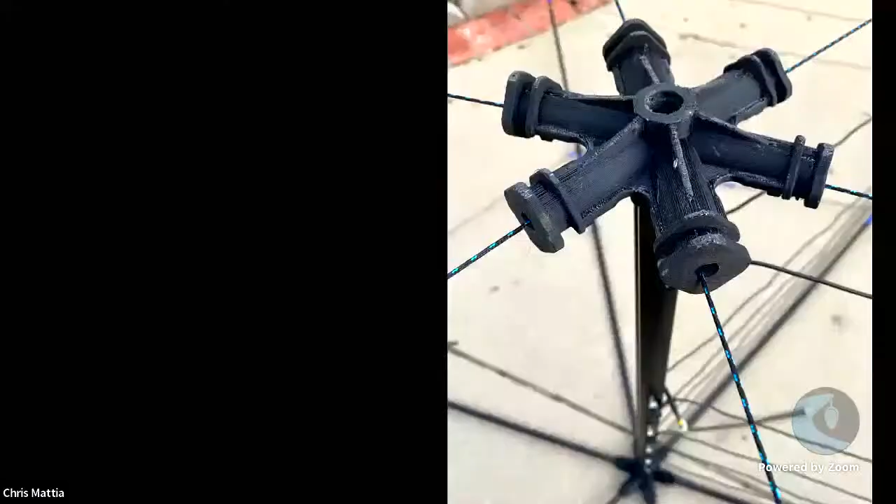For me, it was this day. The BuddiHex arrived to me in the mail. I set it up, and when I got to looking at it closely, I realized that the entire thing had been 3D printed. This was an early prototype of the BuddiHex that I was beta testing, and it had been designed on a computer by a ham, printed out by the hams, and then sent out to other hams to be able to test and operate.

I was able to make contacts around the world with this. The light bulb at this point went on in my mind. I'm a ham, I can do this as well. I can create things as well. I just need to get the right tools to be able to do that. A lot of that comes out of your own imagination.

So I started to begin to modify some of my own gear, much like a lot of hams do, and started to hack together various different projects from other parts that I had laying around the house, or as one of my colleagues likes to say, crap from my garage. We were able to put together a rotator to be able to rotate the hex, and it worked. It worked really well. But that was just the beginning.

Now we want to start taking this world of being able to make and design and create content and do it in a way that really can take your content to the next level for what you're doing within ham radio.

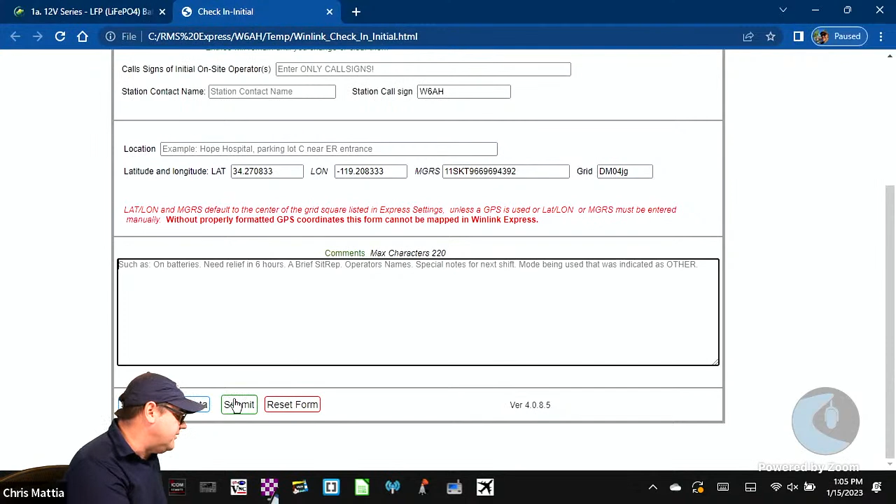After you finish filling all of that out, go ahead and hit the submit button. I'm going to close this and minimize this real quick. It'll fill in the information here in the form, and then just go ahead and post that to the outbox, and then open the session and send the message.

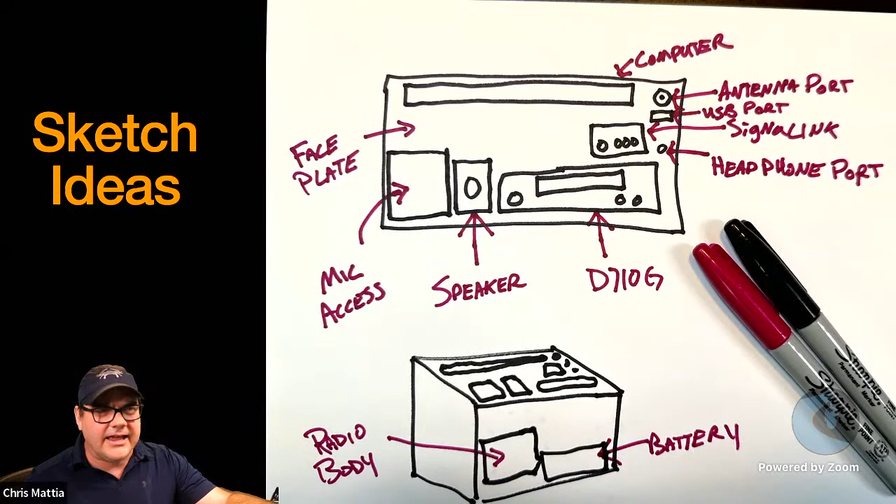In this case, I was laying out an idea for a Go box, and I literally just used a couple of markers and a piece of paper. It's a perfect way to get started. And for some projects, this may be all you need to be able to do. So don't think you have to go through all the different layers and layers of design in order to be able to do this.

The next option would be to build some kind of a scale model. And a great way to accomplish this is to literally take your pieces of equipment, grab that old shipping cardboard box that just showed up at your door, open it up, put the piece of gear on it that you want to incorporate or sketch out some ideas, trace around it, and then cut it out. Now you have models that are the right size.

You may need to modify your model so that you've got the body of a component. You may need the faceplate with both the depth of it as well as the look down on it, so you get a real sense as to the dimensions as you're trying to lay out an object. Again, this is super, super easy to be able to do, and it's something that probably all of us have done at one point or another.

What we're going to dive into today is virtual 3D modeling, and we're going to use a tool called Fusion 360. Now, Fusion 360 is a professional engineering tool for building 3D models, and it does all kinds of fancy stuff that we're going to barely even scratch the surface on. We're going to just focus in on what hams need to know in order to be able to become a little bit proficient. And today our goal is to try and build 3 different models.

The first model we're going to build is a battery. So if you're looking for different gear, you may be looking at a variety of the different batteries that are offered by a company. And you may be wondering to yourself, hey, will this particular battery fit in the box that I'm building, or is that battery going to fit?

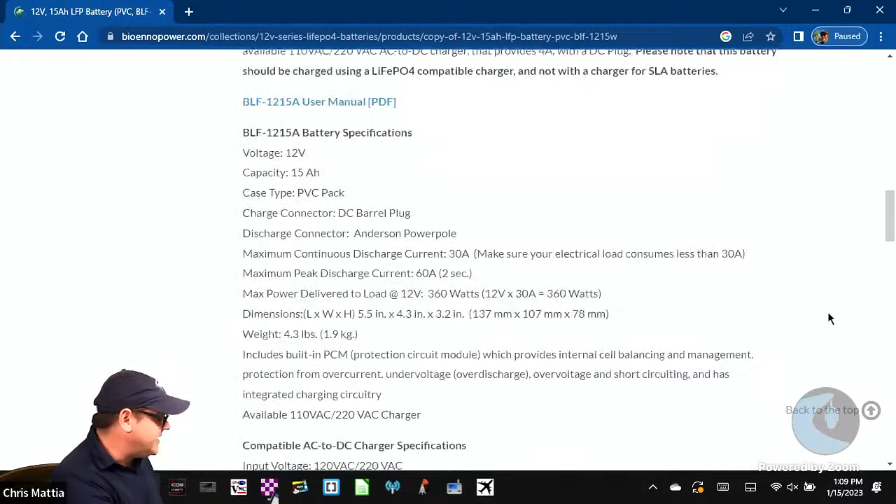If you look on a lot of these pages from manufactured products, if we scroll down the list, you'll oftentimes find a line that has the dimensions of that product. Here it is right here, 137 millimeters by 107 by 78 millimeters. Well, how big is that? How big is that in comparison to other things?

You can of course take your ruler and get it out and start measuring things. You can sketch it out on cardboard. That would help. But we're going to start with that model. Then for our second project, we're going to actually model one of my radios, the body of the Kenwood D710G.

What I want you to get a sense of as we do that is the process of measuring different components, making a virtual model that shows exactly or roughly where the different components are. So if you spin it around in 3D space, you have a good sense as to where your connectors need to be, where the heat sink needs to be, is the power cord going to line up with what you need. Those sorts of things. So we're not getting into crazy detail.

Then for our third project that we're going to work on today, we're going to try to create from scratch. We're going to look at a couple of different products that are out there in the market right now, and I'll talk about the problems I have with the versions I've seen. Then we're going to design a replacement from scratch inside of Fusion 360, and then we'll 3D print it out. So we have a model that will show us how to do that.

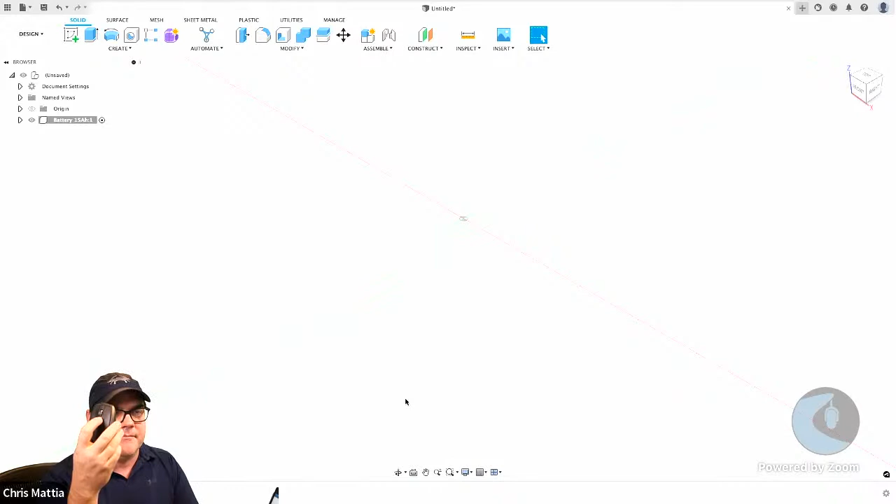Down here at the bottom, there are some additional controls for you. The very first one is a rotate or orbit item. If you have a mouse with a middle button, not the wheel but a middle button, you can click on that, and as you drag around, it will pan your object around. If you hold down the shift key while holding the middle button, it will allow you to spin that object around in all kinds of ways. You can always come up and click home to get back to the normal view.

If you do not have a middle button, just click on orbit and then click and drag around. Pan would be the hand—click and drag around. If you have a trackpad, like on a laptop, many of them let you set a gesture of two fingers to pan around, and holding shift with two fingers will allow you to rotate it. So that's how you work with the objects in here.

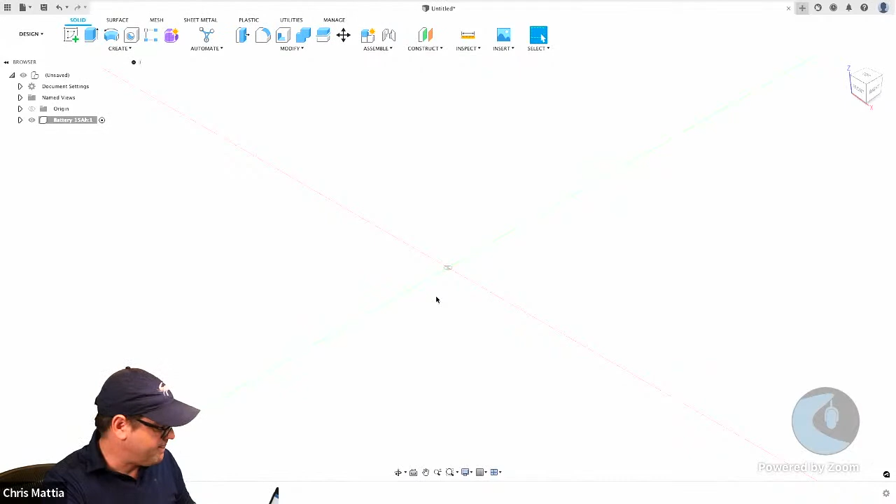So let's start building out this battery. If I quickly jump back over, we can see that this battery is 137, and we're going to work in millimeters.

Why millimeters? Well, because I didn't like fractions when I was in school, and I don't want to mess with fractional inches or decimal inches or any of that stuff. You're welcome to do that if you'd like, but working in millimeters is easier since most models you find online are all in millimeters.

I should also mention that the only tool you need for doing this is a simple ruler. Any ruler will do—that quick, cheap little plastic ruler works just fine. Just make sure you've got one where you can read the different units clearly. Do you need a fancy one of these things? No, you don't. You can do this with just a simple ruler. This is all I've used to build all the models I've built thus far.

And for taking measurements on existing things, literally just lay them down, put the ruler on top, and measure what it is. It's that simple.

You're not having to do anything beyond that. Since I'm in the overhead cam, let me also talk a little bit about what this thing called a component is. So we're going to work within this project.

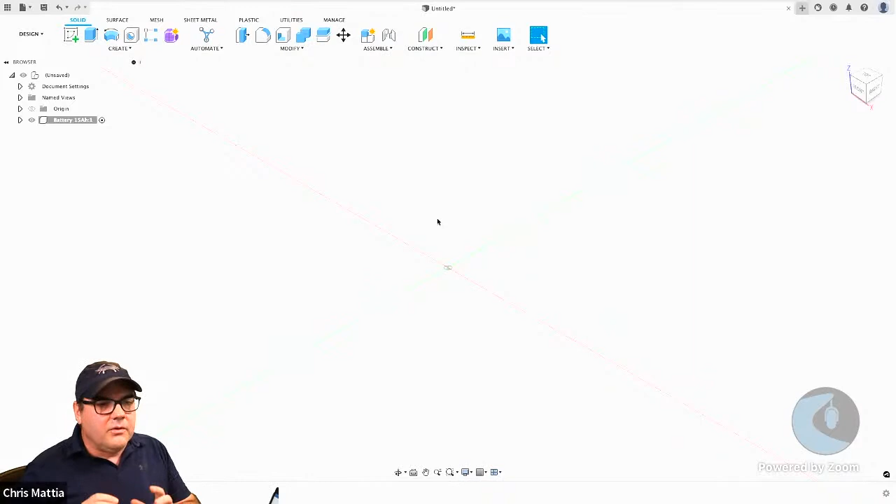And when I say project, I mean we're going to build a battery in one file. We're going to build a radio in another file. That's going to be our project. In the world of engineers, of building things within Fusion, you would start to think of individual components.

The top case of the KX3 here would be a component. The VFO knob would be a different component. This knob would be a different component. If you were to open it up and look inside, this circuit board would be a different component, and this board would be a different component. The back would be one, the top would be one.

We're not going to get into that. We're not going to even mess with any of those things. We're going to do a very simple model of this. So don't get yourself too confused and too worried about some of that terminology. You can get more complicated if you need to, but you really don't have to.

All right, so we're going to go back to, where'd it go? Oops, there's my walk up. Boop, that one. All right, so we have an object that is 137 by 107 millimeters by 78 millimeters. So let's go ahead and build that.

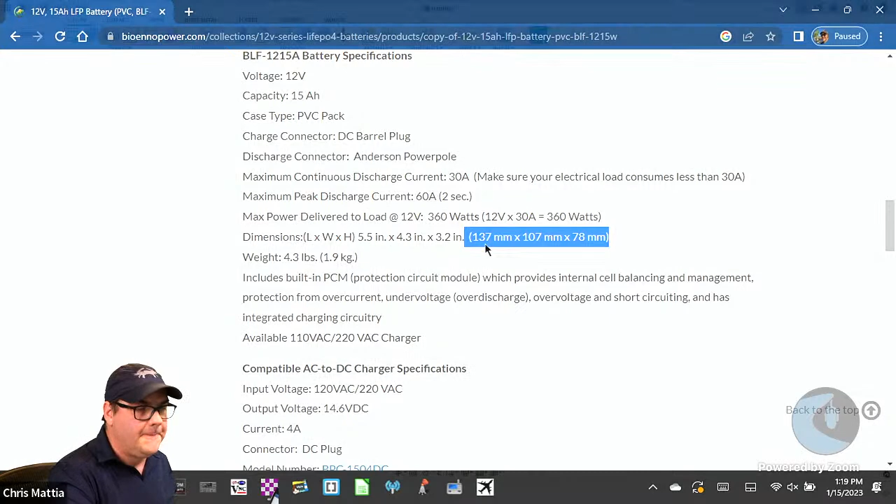All right, so I've got my Fusion project. The first thing you do, remember, is create your component. The second thing you do is you're going to create a sketch. You always start by creating a sketch of something, whether it be a sketch on paper or a sketch in 3D.

And if you look up here in the toolbar, this very first icon up here is the Create Sketch icon. So you just go ahead and click on that, and you get this little origin thing that shows up here. And what the heck is all of that?

Well, what we need to do is we need to tell the sketch, we need to tell Fusion 360 which axis we want to draw on. We want to draw just looking down on the top to be able to build this. So we're just going to click on this portion on the upper right. We're going to click on that, and notice it just spins around and drops us down.

If you look at our little widget up here in the top, you can see we're looking at the top. You could have also clicked the top here and it would have spun us right down to this location. Okay, so we've got our sketch now.

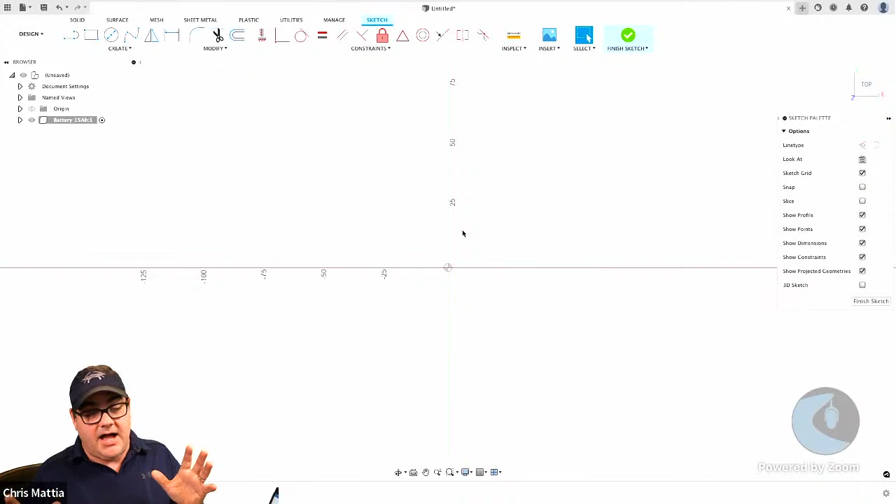Now what we need to do is actually draw a box, because the battery is essentially a cube. So you're going to come up here to the top, and notice our tools have now changed. These are now the sketch tools, and we're going to start with a rectangle tool.

So we're just going to come up here, click on the rectangle. We're going to come down. The center point, if you remember back to grade school when you learned about XY coordinates, the center of that, the 0,0 point that's right here, we're going to start drawing from there. So we're just going to click right at that point, and we're going to start to drag out.

And you'll notice a couple of things. First of all, we get values that show up both at the top and on the left and on the right, or on the bottom and on the left-hand side. And it highlights for what size we've drawn.

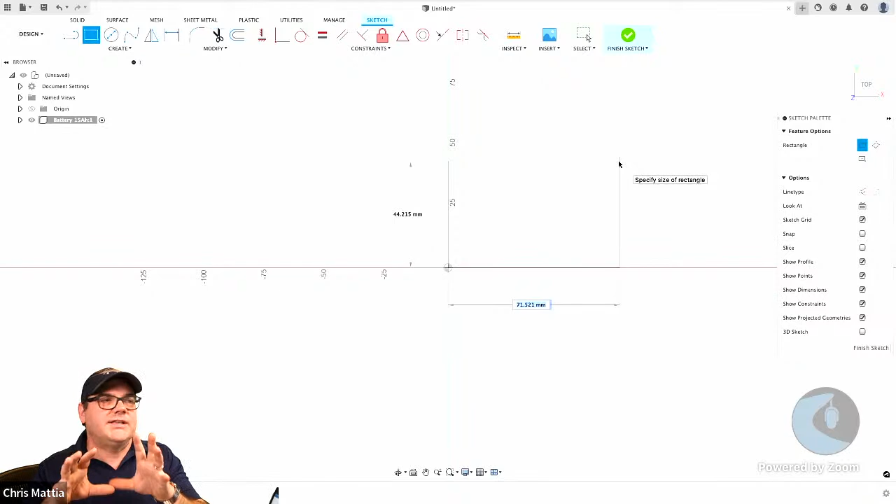So you could try and draw out 137 here. Whoops, let me undo that. I didn't mean to let go. Let me come back and start over again. Click and drag out. You could try and drag out until you got that bottom value to be 137, but you don't have to. You can see how it's highlighted already.

So I'm just going to go ahead and type in 137, and it locks that in. And you can see right next to the value that I just typed in, a little lock icon appeared, meaning, hey, this is the value that he really wants.

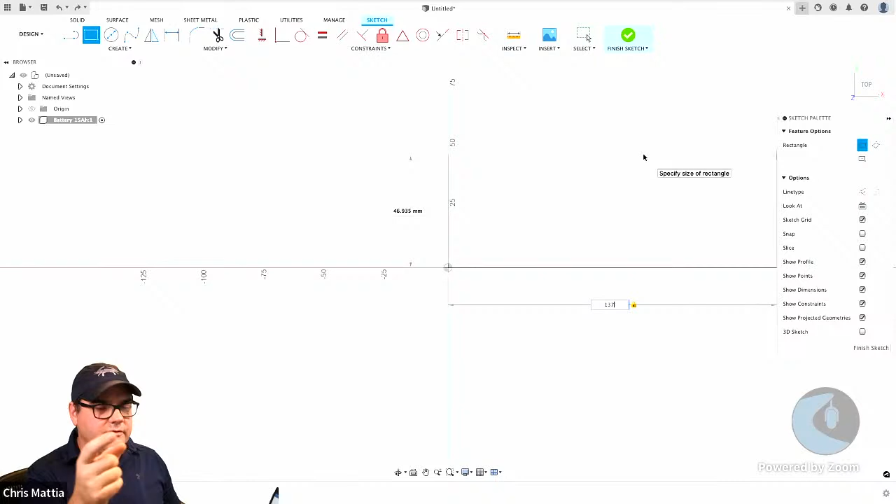So now we want to jump over to the y-axis. I'm going to hit the tab key. So you just hit the tab. Notice it jumps over to that other axis. And now we type in the value for that dimension, which is 107.

I just type in 107. It jumps up to that and locks in. Now I'm just going to hit the return or enter key on my keyboard, and I now have my rectangle.

I'm going to use the center mouse button to pan. If you don't have a center mouse button, just grab the little hand, click and drag. The wheel on my mouse allows me to zoom in and out, so we can get a better view of what this box looks like.

So this is the bottom of our battery. Now we want to add some depth to it. Right now we're working inside of our sketch, so we want to be finished with this. We want to extrude this up.

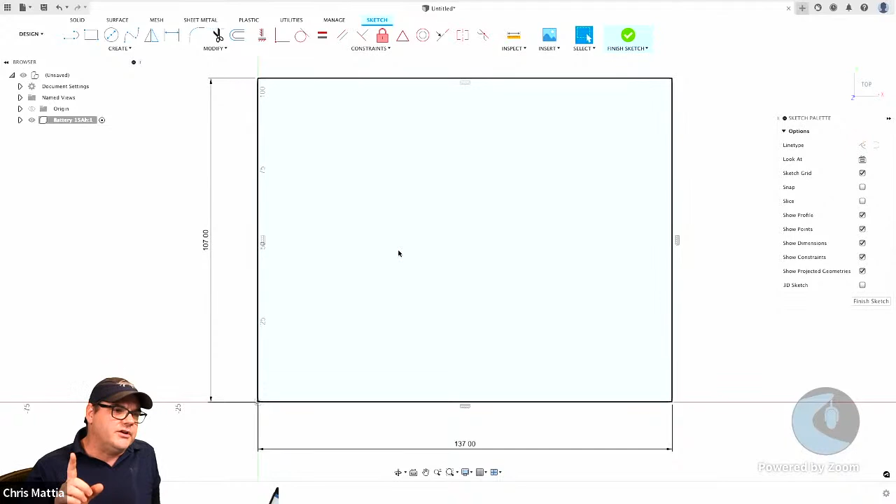We're going to use a command - the first keyboard command I want to teach you, and that is the press-pull command. You enter press-pull by simply pressing the Q key on your keyboard. So I'm going to press Q, and now over here on the right, my sidebar has changed and tells me I'm in the press-pull tool, and I need to make a selection. So I just click on the thing I want to press and pull.

Fusion selects that and creates a little place for me to enter a value. If we go back and look at the depth of this battery, it is 78 millimeters. So again, I just type in 78, and then hit enter on my keyboard.

Now, it doesn't look like anything happened other than this is now gray. But if I hold this and orbit around - if you don't have the middle mouse button, click orbit - I'm going to hold down the shift key, click the middle mouse button, and rotate, and we now have a cube that is exactly the right size for the battery.

So this is the size of a 15 amp hour Bioenno battery.

That's kind of cool. Let's go ahead and save this project.

I'm just going to come up here - there's a little page icon, looks just like the new mail message in Winlink. I'm going to click the little page icon and say save. You can also use Command or Control S to save that. And I'm going to call this my battery_15 amp hour, and just go ahead and save it in the default location and say save.

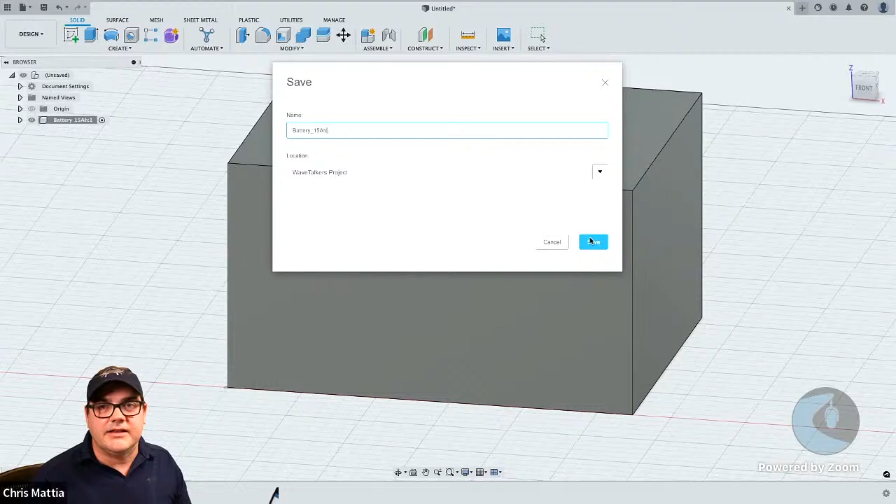Now, when you're working in Fusion 360, everything is stored up on their servers. There's nothing locally stored on your computer - it's all stored remotely up in the cloud, which is really nice because once you have Fusion set up and running, if you go to a different computer, you can just log into Fusion and get access to all of your files.

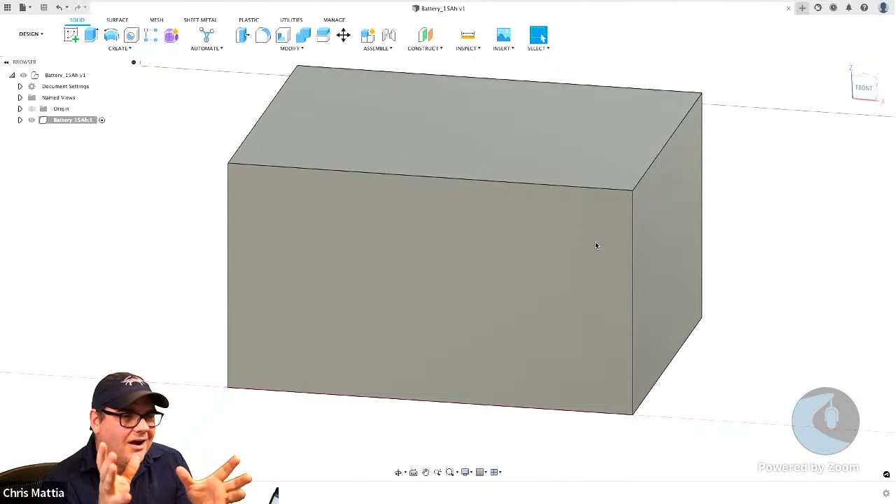Now, we could think this model is finished at this point - we could just plop this into other things and have this to work with. But I like to be able to look at this and go, hey, that's a battery. And I know most of my Bioenno batteries are all this kind of blue color, so let's go ahead and add a little color to it.

So I'm going to come up here and go up to modify. You can see these tools are grouped - there's a create section and a modify section here. I'm going to click the little dropdown right under modify, and if we come down the list, you'll see there's an option for appearance, with a little A next to it. So I'll go ahead and click on that, and it brings up this other little toolbar.

Now, this has a lot of different types of objects you may want to have - how do you want to add some appearance changes to this? If I come down a little bit, you'll see there's an option here for paint. I'm going to go ahead and click on the little folder for paint, and let's go ahead and open up the glossy paint folder.

Stay clicking on it. Come on.

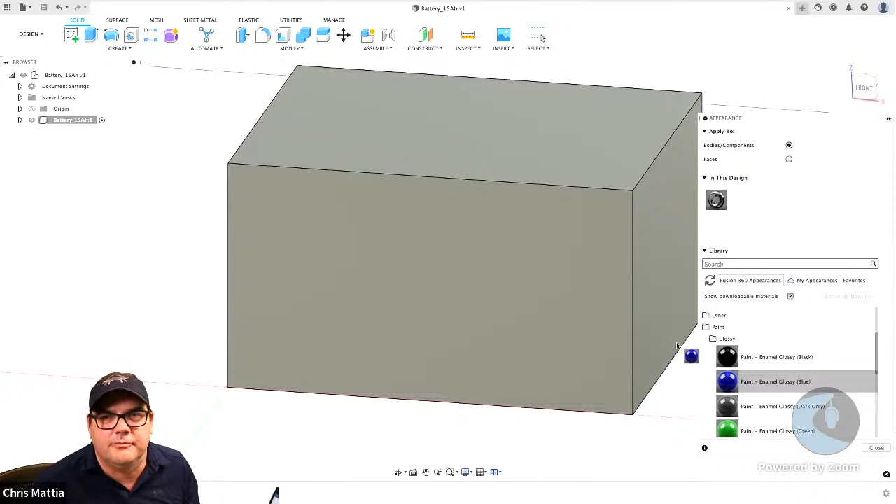Double click on it and it'll open. There you go, here's a nice blue color. I don't care if this is the right blue or not. I'm just going to take that little blue ball, drag it over, and drop it on the model. Now I have a blue box that is the exact right size for this particular battery.

So if you think back to last week where we were talking about designing a Go box, will this particular battery fit inside of the box? You could very quickly build out a couple of different models for the different batteries you're considering and drop them into your virtual Go box. You can see, does it fit? Will it fit in this orientation? Will it fit in that orientation? And so forth.

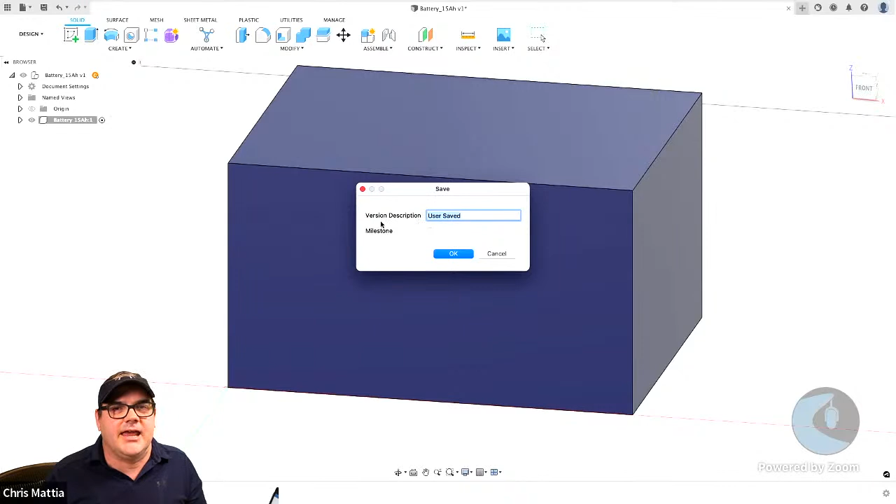I'm going to go up to the file menu and save. Each time after the initial save, you get these little pop-ups that say version description. It initially says user saved. That's fine, we'll go ahead and say okay.

Now what that's doing, you come up to the top and you'll see this little waffle menu, this little grid of icons in the upper left. If I click on that, it brings up a little sidebar over here, and this shows you all of your different projects and all of the different files you've saved. Here is that battery, 15 amp hours. If you look off to the right, there's a version number and a little drop down next to that. You can click on this and see each different version, since it saves a full history as you are building your file.

So if you get into working on something and realize, hey, yesterday I was working on this and it looked a lot better, you can actually go back and open up a previous version of that file, and it'll work just fine for you. So that's how you build a basic project.

Now we're going to take this to the next level. We're going to go through and model my Kenwood D710G. If you look at the body of the box, it is basically a box, a little cube. I have the dimensions written down. You would normally just go through and put your ruler on here and measure what that is. This is roughly 137 millimeters in that direction.

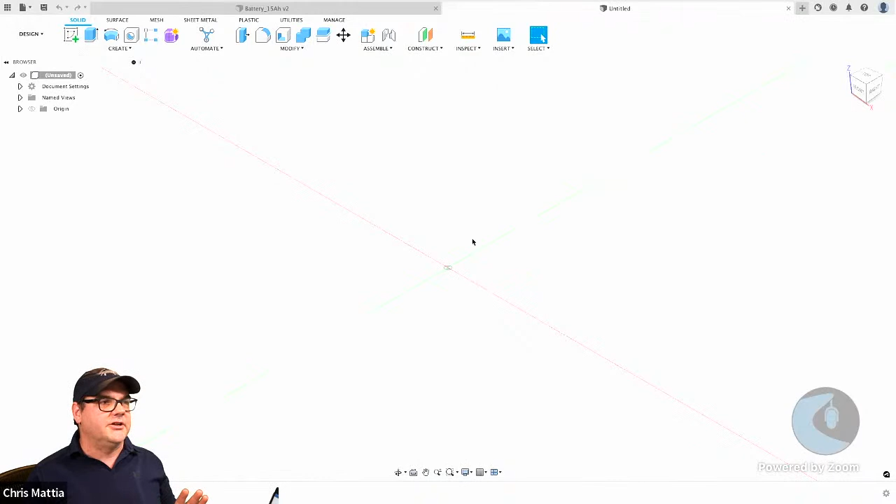I'm going to get rid of the little sidebar over here by simply clicking that waffle menu at the top, and that goes away just to save a little screen real estate so it's easier for us to see and focus on what we're building. Just as before, we're going to start off by creating a new component. I'm going to right click, or control click on a Mac, on this top item, and we're going to say new component. It's going to spring open this window, and I'm going to change the name and call this D710G.

Ladies and gentlemen, I think we lost Chris. Or is it me? Sorry? Do we? Oh, it was me. Never mind. Still there? Okay. Apparently, sorry, thought I lost you. Yeah, well, no, you did. He froze up to me as well. Oh, I froze a little bit. Yeah, my internet connection, we're having monsoons here in California.

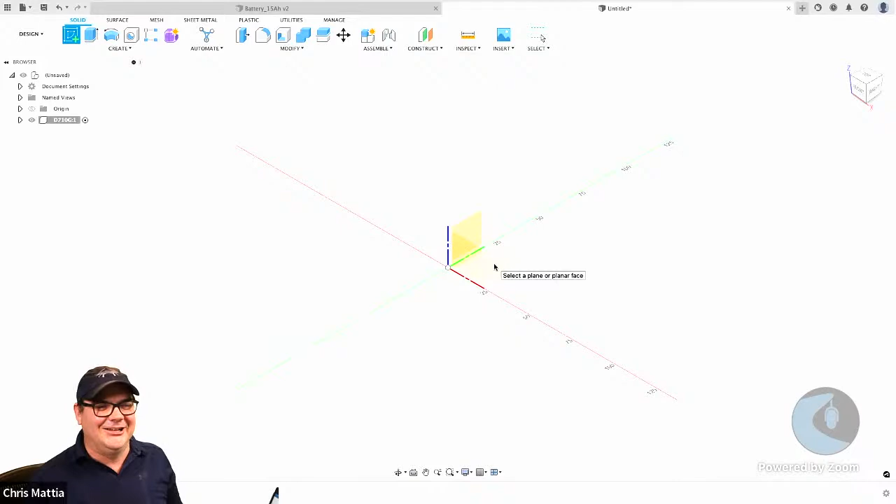Okay, so I'm going to click on this upper right corner. That's going to take us into the XY coordinate grid. Once again, we're going to create a box using the rectangle tool. Come back down here to the origin.

I'm going to click and drag away from the center origin, and type in my first side. I'm going to make that side 137 millimeters. I'll hit the tab key, which takes me over to my Y coordinates, and type in 143. Then hit enter or return on my keyboard, and that locks in my rectangle.

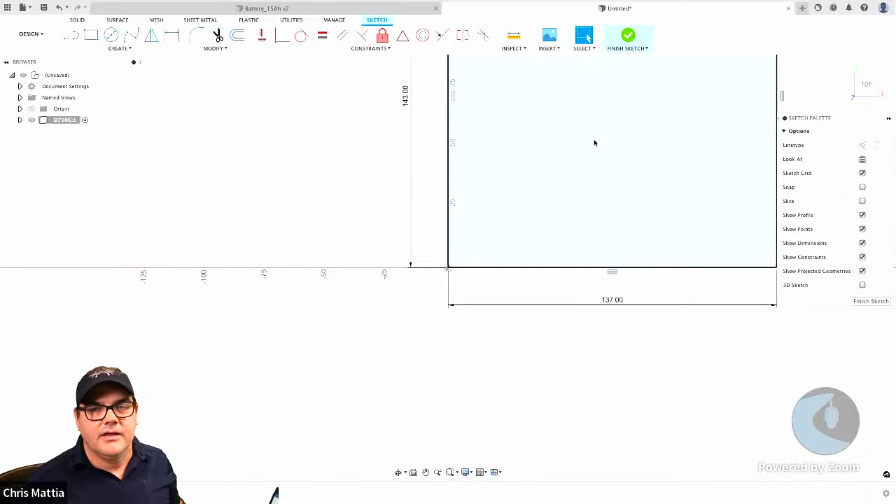I'm going to use the middle mouse button to click and drag and bring this back into view. And I have my scroll wheel so I can zoom in and out on that object. So we've got our base sketch now.

Now let's add the depth that we need. We have the body of our radio, and that radio is going to be 42 millimeters high. So once again, we're going to use that Q command on our keyboard. Just press Q, and it's going to take us into the press pull. We select the sketch, and it asks us how big do we want this to be. We're going to type in 42, and hit enter or return.

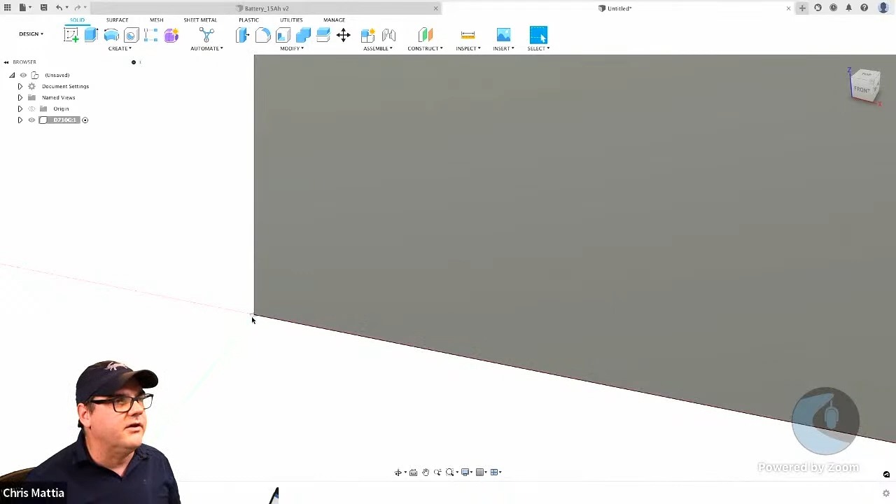Now if I hold down shift and use the middle mouse button to orbit, this is the size of my Kenwood D710G. You can see down here in the lower left-hand corner, that's that origin point. If I zoom in a little bit, just scrolling in on the wheel, that little origin is where we started drawing from.

So we are going to refer to this face right here as the front of the radio. And I'm going to hold down the shift key, use the middle mouse button, and drag around to the back. This face here is going to be the back of the radio. I'm just going to go ahead and click on that and select it.

Now we want to start laying out the components that are on the back. We've got our SO239 connection, we've got a fan back there, we've got all of those different components. So we want to start sketching those out.

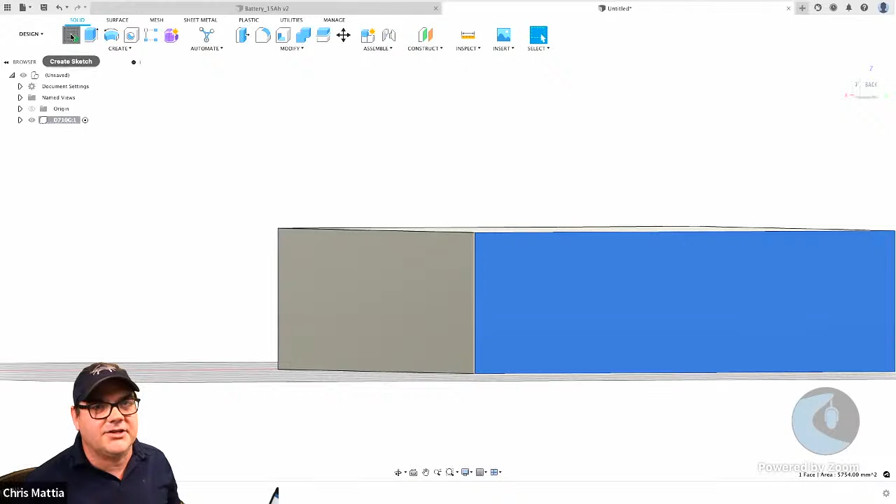The sketch, you can sketch on the surface of any other object. So we have this back face selected. I'm just going to come up here and click on sketch, and notice it just kind of snaps down in. I'll click on the middle button to pan that over so it's centered again, and zoom in just a little bit.

This is a new sketch that's now on the back of the radio. Now, what am I talking about with these sketches? If you look over in this components browser on the left, come down here to the bottom. Here's our D710G. This is the component that we're working in.

And if we twirl this down, you can see there are a couple of other items inside of this component. There's origins, there's bodies. So the radio is a body, this box that we have is a body. And then we have sketches. If I twirl that down, you can see there are two sketches currently.

So I'm going to click on the first sketch, click on the name of it one more time, and I'm going to edit that, and change this to the body of D710G.

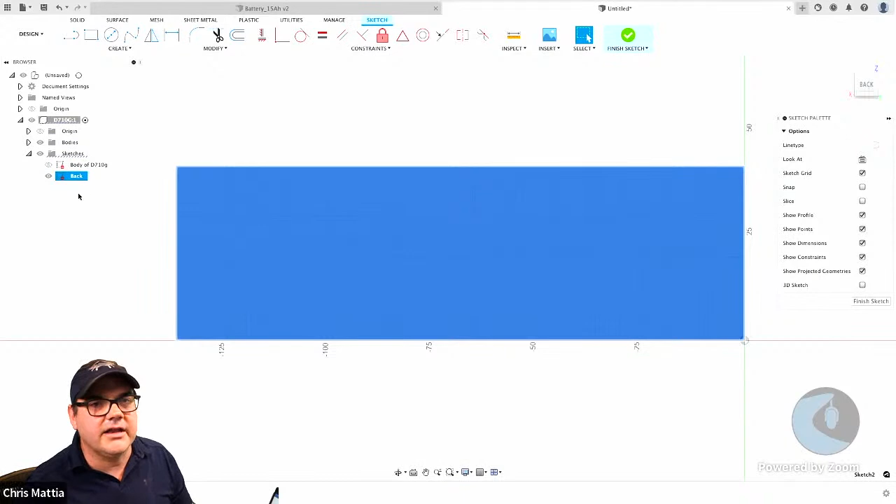Hit return. I'm going to take the second sketch, click on that name one time, notice it highlights it. Click a second time, and I'm going to call this the back of my radio. So now we know that this sketch is for the back.

So we're here inside of Fusion, and what we're going to do is make an SO239 connection. We're going to come up here, and the simple shape that looks closest to that is the circle. So I'm going to click on the circle and come down here.

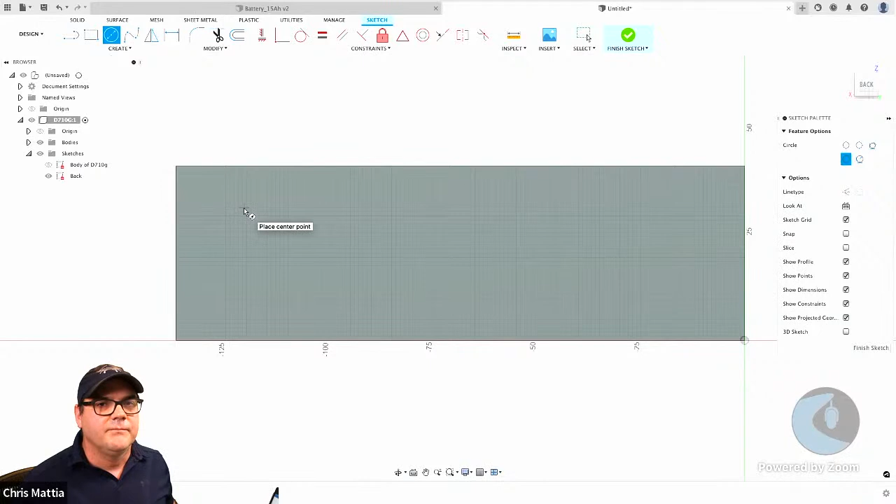When you draw a circle inside of Fusion, you start with the center of the circle and click and drag out. You'll notice we get those values showing, asking how big this circle should be. This circle needs to be 15 millimeters, so I type in 15 and hit enter, and I have a circle. Is it placed in the right spot? I don't care right now, it's just got to be close enough.

Next, I'm going to make a box. I'll come back to my rectangle tool and make a box because the next item is pretty much right next to it. I'm just going to click and drag a box next to it. It doesn't have to be super precise because once again we get our values to type in. This is going to be 40 millimeters, so I type in 40, hit the tab key, it'll jump over to my other axis, and once again type in 40 and hit enter. Now I have a 40 by 40 millimeter box.

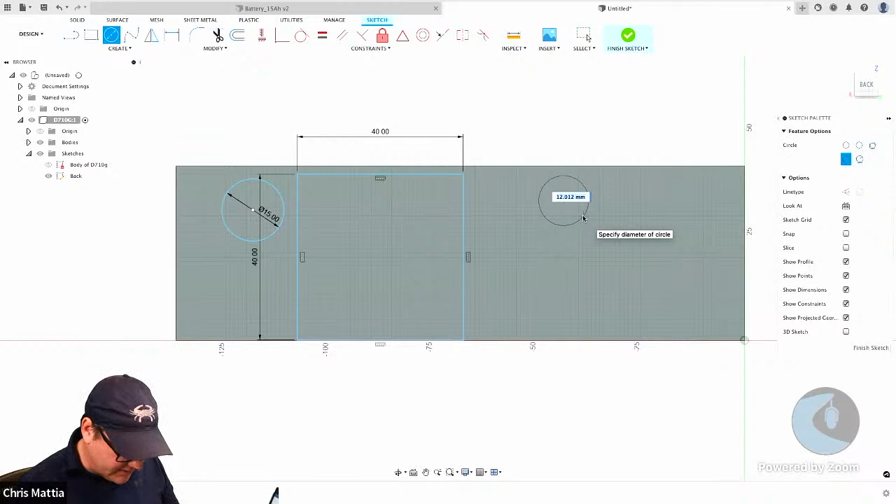Perfect, we're rocking through this. Now we need our two data ports up here, those are both circular shaped, so we'll come up and grab our circle again, click and drag to create a circle. These circles are going to be 10 millimeters in diameter, so I type in 10, hit enter, and I'll create another one of those. Grab the circle tool, click, drag, 10, hit enter.

Let's go ahead and make the bottom two as well, those are both 7 millimeters in diameter. I'll come back up, grab my circle tool one more time, click, drag, type 7, enter. Got a 7 millimeter circle. Come back one more time, circle, click, drag, 7, enter. All right, we've got all of the ports that we really need to have.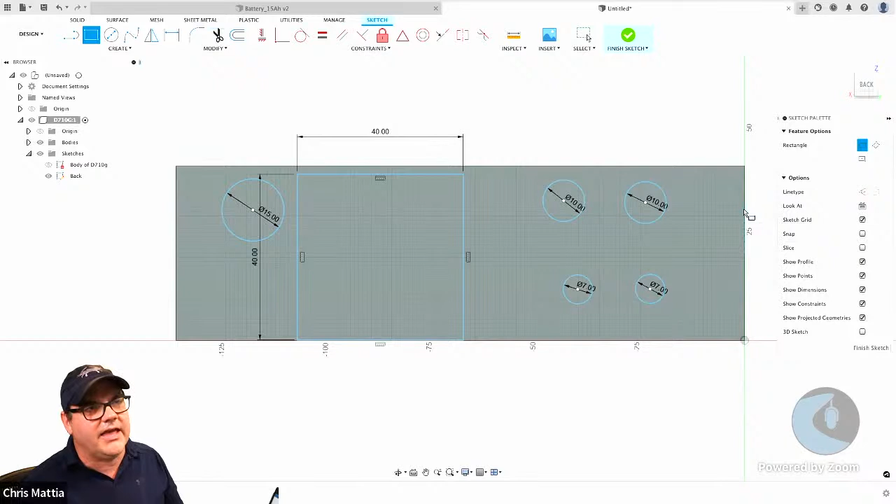We also want to have these two little wings that go on either side, and the important one is this one over here. So we come back up to the top, that's a rectangular shaped object. This time I want it right off the edge of the body of the radio, so I move the mouse right over to the edge, right on the edge of it, and then click and drag inward and down. Fusion figures this out, it's smart enough to know you probably mean to draw a rectangle that is aligned with the edge.

That's pretty cool, so now I can see I've got the width selected, and I know this little widget is 6 millimeters. I type that in, hit the tab key, now I'm on the vertical axis, type in 22 for the 22 millimeters and hit enter. Now I have a box that is exactly the right size for that. All right, that's all I'm going to model at this point.

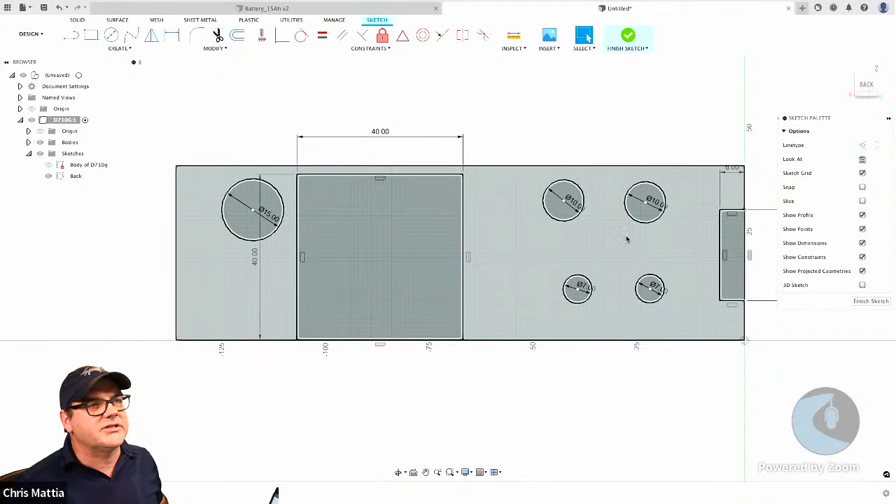Now let's go through and start extruding some of these, let's make sure that they're in the right place.

Let's extrude them. First thing we need to know is that if we measure our SO239 and measure our fan, they stick out about 15 millimeters.

We'll hit the Q key on our keyboard, same as before, and start with the SO239. As I move the mouse over that object, it starts to highlight, and all I have to do is click to select just that one object, and I know it needs to be 15 millimeters.

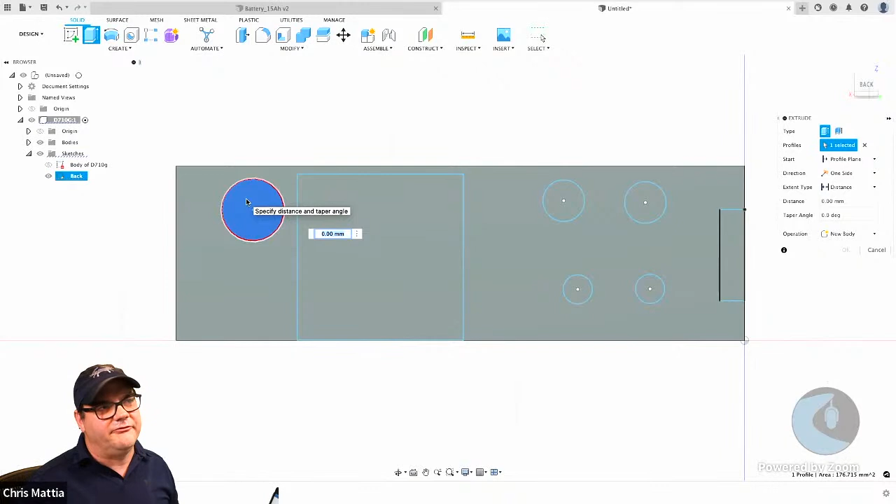I know that my fan is also 15 millimeters, so with the SO239 still selected, I'm going to click on the fan also. Now I've got the circle for the SO239 and the fan both selected. I'll type in 15 for 15 millimeters and hit enter.

If I hold down my shift key and my middle mouse button, I can see that I have that SO239 connector and the fan hanging off the back. If you're modeling this, that might be all you need—make sure you've got room for your connector or your fan. But it might be helpful to know you have these other ports over here as well.

To get these other ports, we're going to go back to our sketch. Here's the one that's the sketch for the back. Just right click on that and come down and say edit sketch. It spins us right back into our sketch. I'm going to click the middle mouse button to click and drag over.

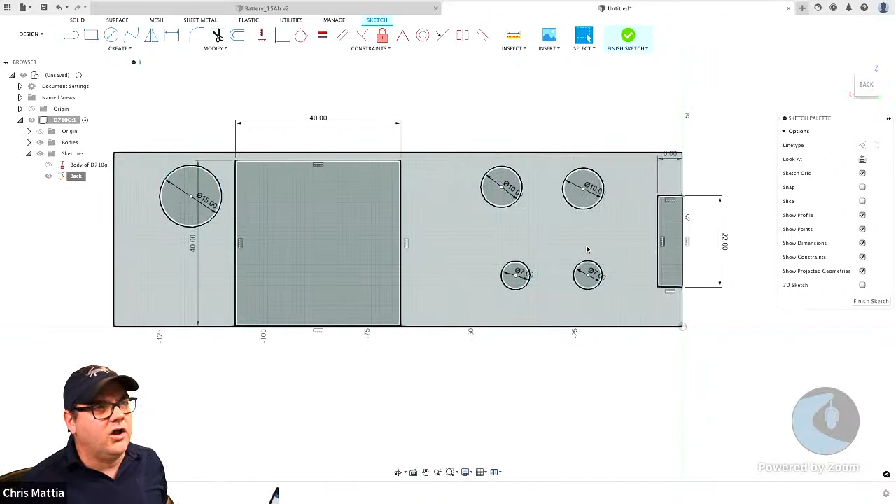Now we're going to extrude all of these ports on here. But if you look on the back of the radio, these ports do not stick out—they stick in, going inside the body of the radio. So let's go ahead and model that. Let's say we've measured these and we know they stick in 3 millimeters or so.

We're going to come back over to our model here, hit the Q key again for the push-pull tool. I'm going to click on this first circle, the next circle, and then this circle, and then this circle. All right, so we have all of those selected.

One thing we haven't been looking at is over here on the right—as soon as we hit that push-pull command, it brings up some control information on the right. If we wanted to make these go out, we'd just type in the value like we've been doing before, and it tells us the distance here. Anything we enter into this field is also entered in the distance section.

You can notice there's this little tiny blue arrow. One thing you could do is grab that blue arrow and pull these objects straight out for some amount of distance. You can also push back in, and notice how it turns red, meaning it's cutting into that object. If you look closely, there's a negative value—positive means go out from the surface, and negative means go into the surface.

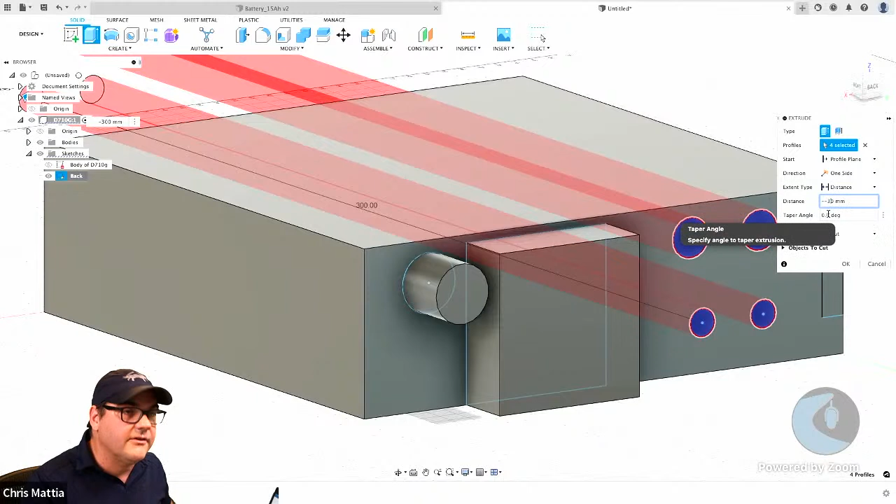So we said this was going to be 3 millimeters, so I'm going to select this and type in -3 millimeters. Whoops, you've got to make sure it's right. Notice right here the distance, I can come up here and do -3. I haven't hit enter or return yet... point. There we go.

Negative 3.0 millimeters. That should go into my object. I've got to make sure I've only got one negative sign. There we go, now two negatives make a positive.

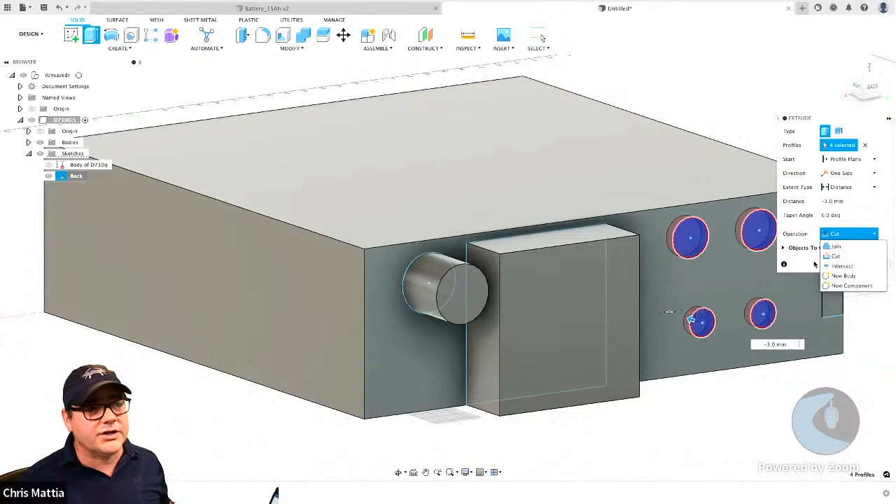I also want to point out there's some additional operations you can do. When we created the SO239 and this one, the drop-down field said join—Fusion figured out you're extruding something and want to join it onto the object you already have. Now that we've gone into the body of the radio, Fusion is smart enough to say you want to cut this out, make a hole. So we're going to let it create a cut, and say okay.

Notice it doesn't look like anything has happened. When we extruded these before, I could rotate around, use the shift key and middle mouse button, and see those objects had been created. But now, for some reason, they're not showing up.

That's where I need to draw your attention to one more bit of the interface, down here in the lower left corner. This is called your timeline. We started with our first sketch of the body of the D710, then extruded that body to create the body of the radio. Then we created a sketch on the back—our back sketch—and then did an extrude of the SO239 and the fan.

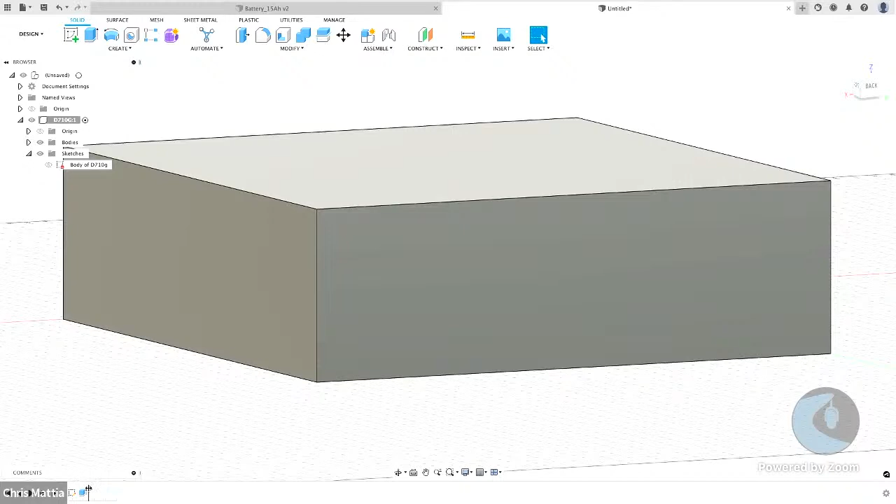This little playhead is our timeline showing where we're at. We can drag it back in time to see what the object looked like at that point, or drag it forward all the way to the end. And there we go, now our objects are being rendered.

If I hold down the Shift key and use my middle mouse button, we can see those ports showing up—we have our SO239 and our fan. That might be all the modeling you need, since you just need to know where things are, but it would be nice if we had these more precisely placed.

So let's go back to our sketch. We're going to go back to the back sketch, right click on it, come down to edit sketch, which takes us right back into this location.

Time for our second keyboard command. The first one we learned was Q, for push-pull, which lets us push objects in and pull them out—kind of like a fancy extrude. Now we're going to use our second keyboard command, D, for dimension or delta. Watch my cursor—right now it's the little arrow. I'm going to press D on my keyboard, and now as I move over different objects, I can get them to select.

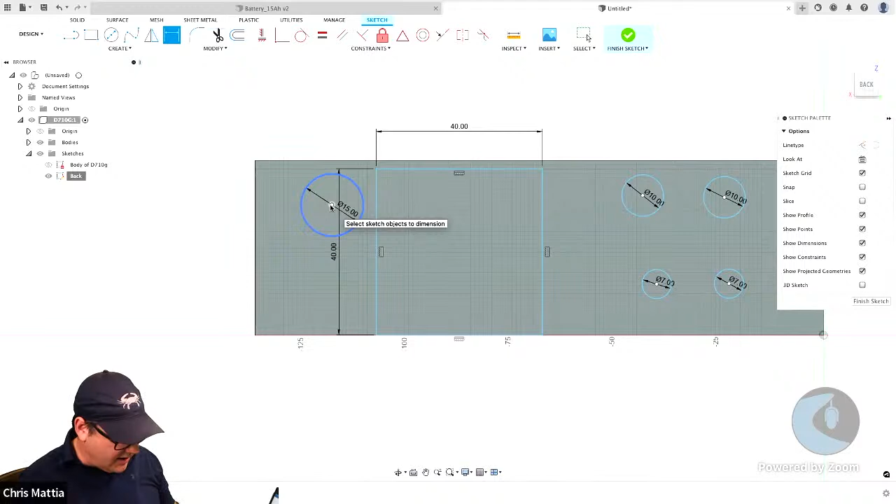With the D key clicked, I'll click on the center, making sure the center of this circle is 18 millimeters from this left edge. I click on the center, move over to the left edge, click on that, and start moving back towards the middle. You can see a new line being drawn with some value in it. I click on that and type in the value I want—18 millimeters. When I hit return, this circle is now exactly 18 millimeters from that edge.

I also know, because I measured it, that the center of the circle is roughly 15 millimeters from the top edge. My D is still selected, so I click on the center, come up to the top, click there, and drag back towards the middle. I've got this value here—click on it and type in 15, and watch the circle when I hit enter. Boom, it just moved that circle.

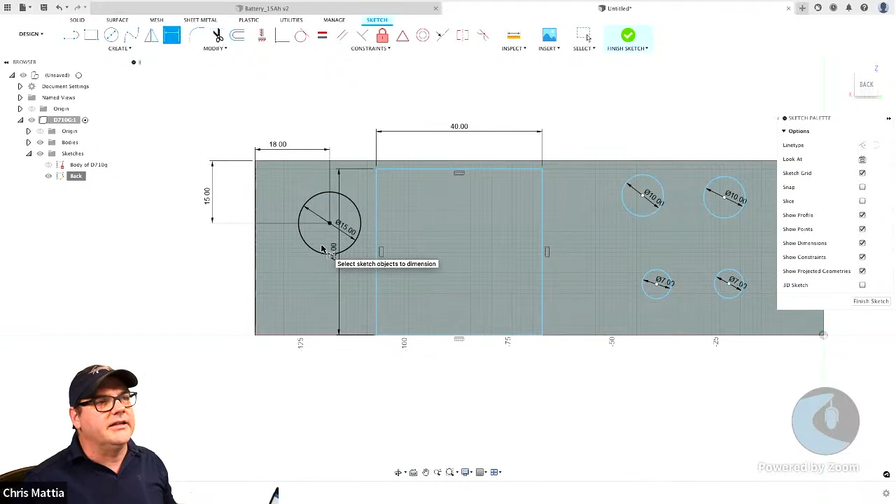So there's the SO239—it is now exactly placed in just the right spot on the back of the radio. If I was modeling this to actually work, I'd click Finish Sketch up here, then hold down Shift and my center mouse button. Now I know exactly where that SO239 connector needs to be if I need to run a cable inside the box, and I know it needs to be in that location.

You can do that same process with rectangles and with circles. So I'm going to go back to the sketch, right click on it, and edit sketch.

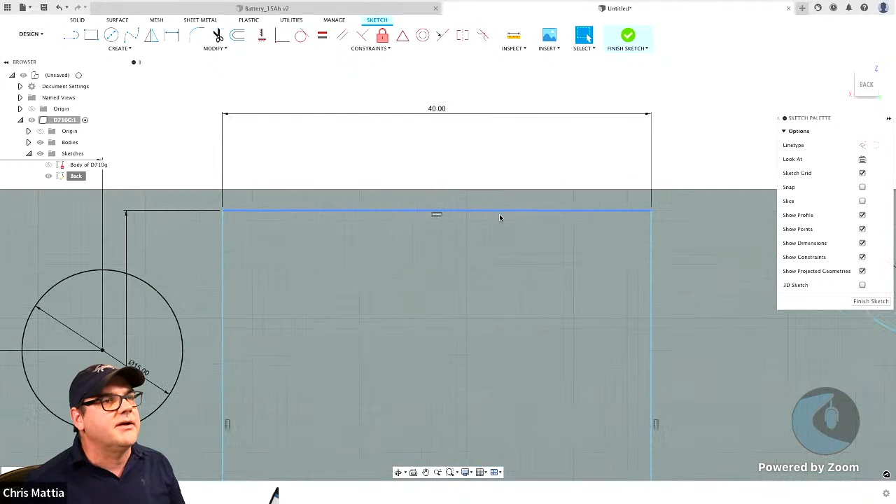I know that this rectangle needs to be only 1 millimeter from the top. So I'll zoom in using my scroll wheel, hit the D key, click on the line, come up to the top, click on the next line, come back into the middle, click, and type in 1. That rectangle is now 1 millimeter from the top.

I'll roll back out. How far should this rectangle be from the left edge? It should be 30 millimeters. So we'll click on the left edge here, go over to the left edge of the radio, click, come back towards it, drag up here, type in 30, hit enter.

That rectangle is now 30 millimeters from that edge. So things are looking pretty good. Not only did it move the sketch, but if we go back and finish the sketch and look at it in the real world, we can see those objects have physically been moved into the correct position. You would do the exact same thing with these objects here using the center.

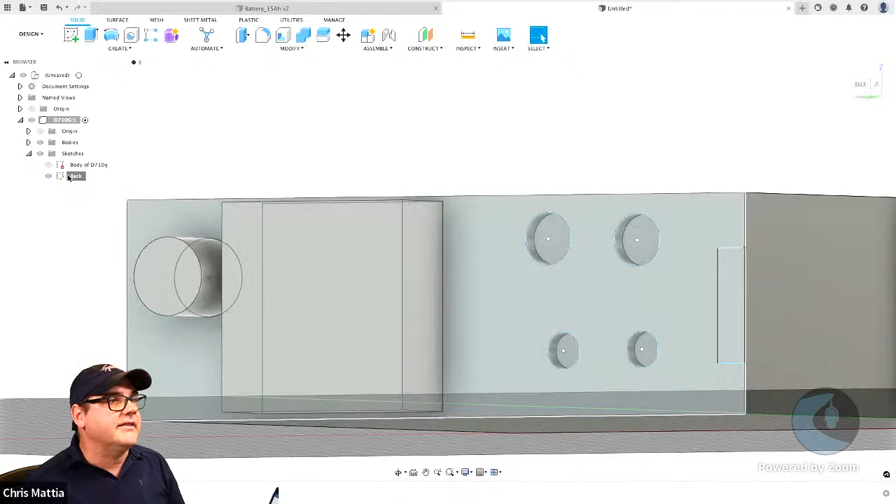Let's do these top two right here. Go back and edit the sketch, and use the middle mouse button to drag over. Now for these, I measured them from the right-hand edge. So I'll hit the D key to get the dimensions, go to the center, come over to this right edge, click on it, come back up, click.

I know that one needs to be 20 millimeters. I'll type in 20, hit enter, and it moves that circle over. Now, instead of measuring... I guess I did measure this one all the way over to the edge. So the next one is going to be 35.

I'll click on the center, come all the way over to the right edge, click, come back toward the middle, go up. This one needs to be 35 millimeters. And both of these are now 10 millimeters from the top edge down. So we'll grab the center, come up to the top, come back down. I'm actually going to drag it up here so you can see it. That should be 10 millimeters.

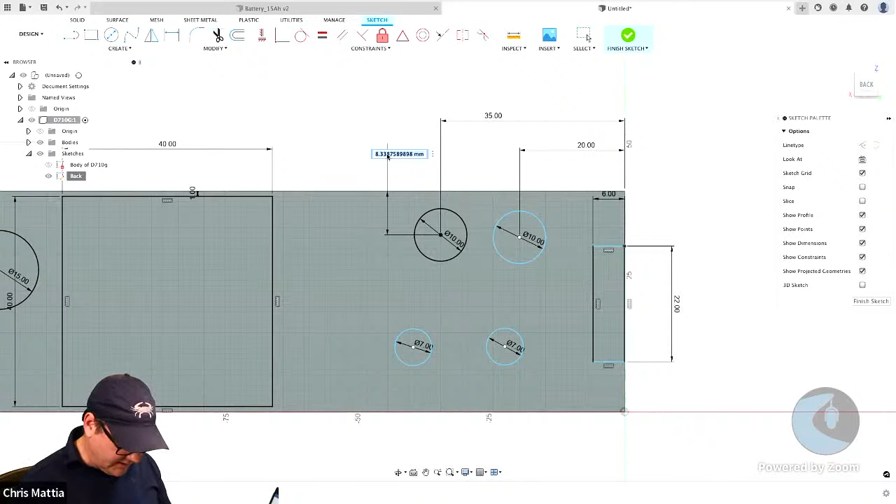That moves it down. Notice this circle is now black while this one is blue - that means this circle is fully defined, fully locked in. So I'll grab this center, come up to the top edge, come back down, and drag it up here so we can see it. 10, enter. These two ports are now in exactly the same location.

Now let's say we want to measure these two objects from each other instead of from the edge. No problem - come over here, click on the center of this circle, come over to this one, click on the center, drag back between the two. I'll do it down here so you can see it. Click. Let's say these two circles are only 15 millimeters apart, so I'll type in 15, and now Fusion will make it so these two circles are 15 millimeters apart.

Then if you want the right distance, I'll go from this center to this edge and back, and that's 20 millimeters. Now those circles are all kind of locked in, and we would define the bottom so that those are all working correctly as well.

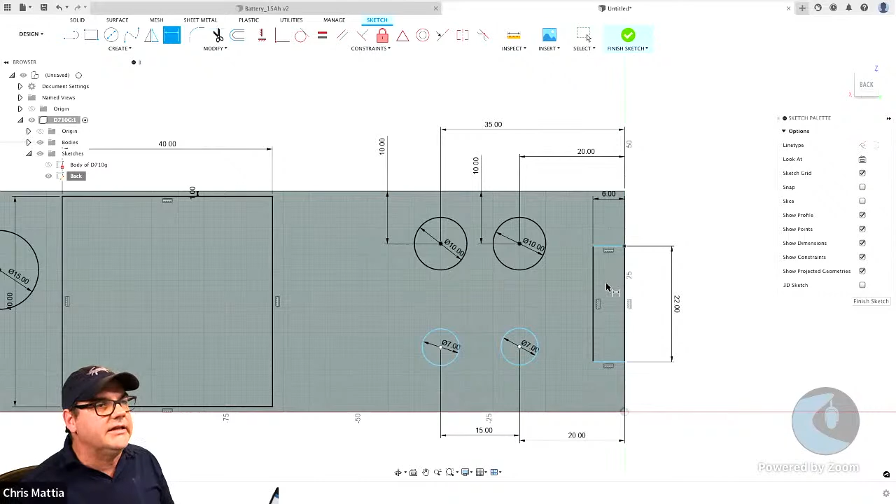I want to do one more here - extrude this object right here, but a little bit different. I'll press the E key on the keyboard so we can extrude this, come over and click on this little tab one time. I know this little tab is also 15 millimeters that extrudes out, but instead of just hitting return and using this join function...

I'm going to click the drop down here, come over, and we're going to create this as a new body, because we're going to do something special to this one here in just a second.

If we look at the actual unit, there's a hole right here, so we're going to put that hole all the way through this little tab. This is a little security hole, so you could actually lock this unit in place. I'm going to go back up here.

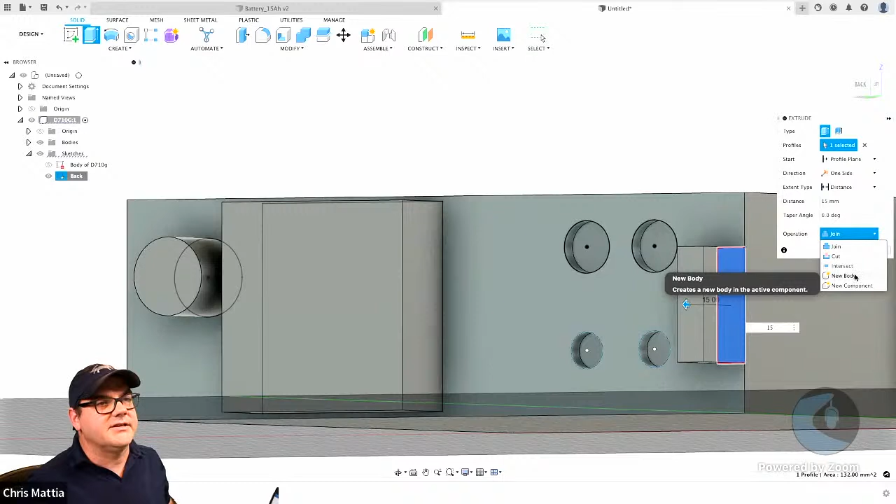Let's go back over on this side, and we're going to say it's a new body, and we'll hit OK. There we go. So we have that. Once again, I've got to pull myself out. Here's our timeline. I'll just drag over on the timeline one time, and there is that object. All right, great, we're looking good here.

We have the back of our radio that's modeled up. It's looking pretty good. So let's go over to this side of our radio, and we would model in that hole the same way that we did these two holes here, using the negative value.

The only other thing I want to do right now is put that hole all the way through this. So I'm going to select this face, hold down the Shift key to add this face to it. Now I've got two faces selected, and I'm going to create a new sketch, just pan over to this portion, which is just this little tab sticking out right here. We're going to model using a rectangle, and put just a rectangular hole in that object.

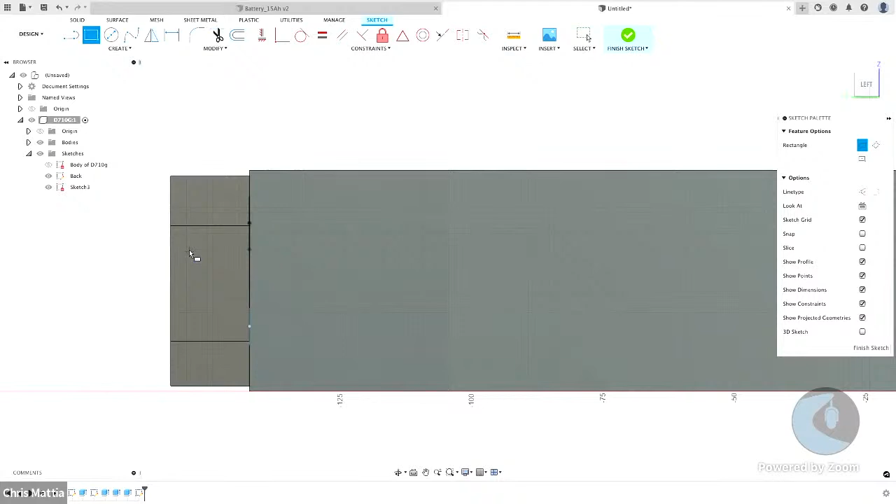If I can figure out where my notes are here, that is a hole that's 5 millimeters by 10 millimeters, a rectangle. So I'm just going to click and drag to create the little hole. I'm going to type in 5, hit the tab key, and 10 in order to create that.

You would dimension this the same way that we did the others, using it to lock in the right size, but we don't really need to do that to create the hole.

What we're going to do now is use that same Q key. Notice we're just still using the same tricks here. We're going to use the Q key, select that rectangle that we just created, and we know we want to go negative. We want to create a hole. We want to go into this object.

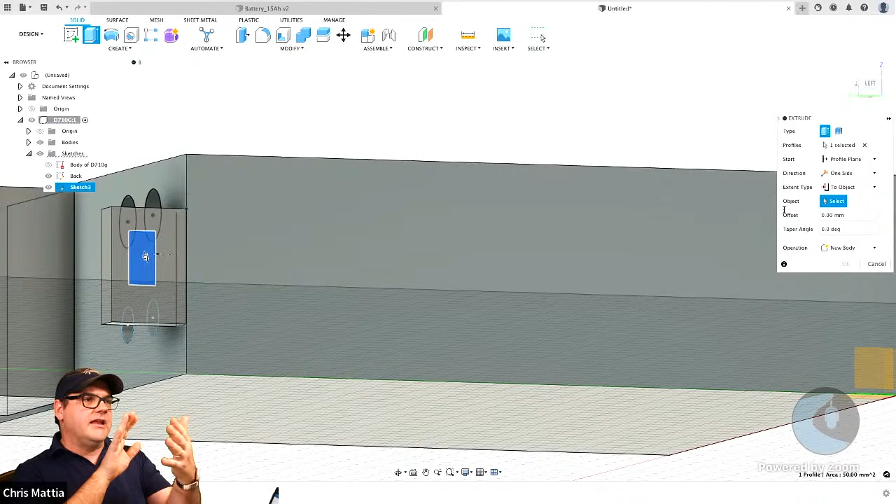But instead of, over on the control window, it's telling us the direction for one side. We're going to click that drop down and come down to extent type. Instead of distance, we're going to say 'to object,' because if we change the thickness of anything, we want the computer to just take care of that model. So now Fusion is asking us, where do we want to cut this hole to?

So I'm going to rotate my model around, hold down Shift and drag around until I can see the back side of this. And here's the back of that little tab. I'm just going to click on that back tab, and notice now my hole has been cut exactly to the thickness of what that object is. I'll say okay, and now I have a hole right there in that back object.

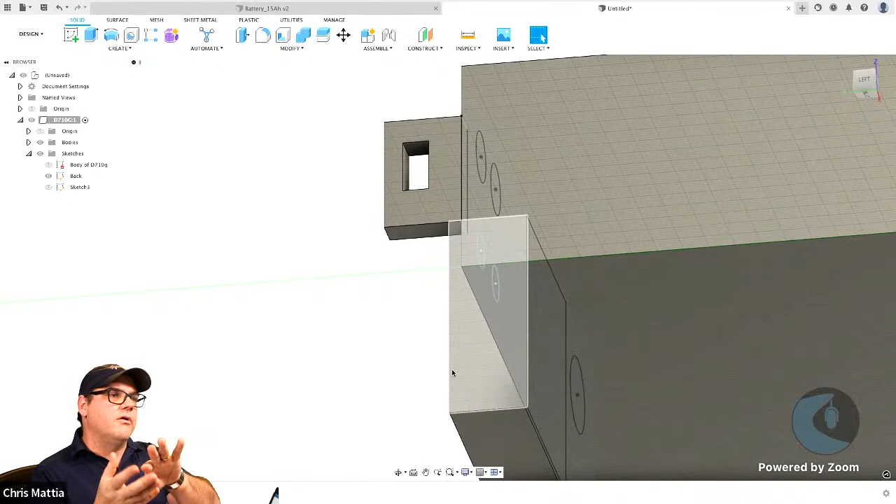So that's how you extrude, create a body, create the body of something you want to model, extrude something out, punch a hole into it as far as carving a little section out. You can punch a hole by going from one side of a model to come up to some other surface. And you can use the dimension key in order to lock in any dimensions you want on your radio.

You would continue now just working around the face of this, the body of this radio, editing the sketches, creating the hole here for the microphone port. You would come around and create a sketch on the front face, creating a hole for where the head connects in here. You could even come down on the bottom of the radio and model out those little grooves that are for the heat sink. So that should give you enough to be able to get started doing a basic model.

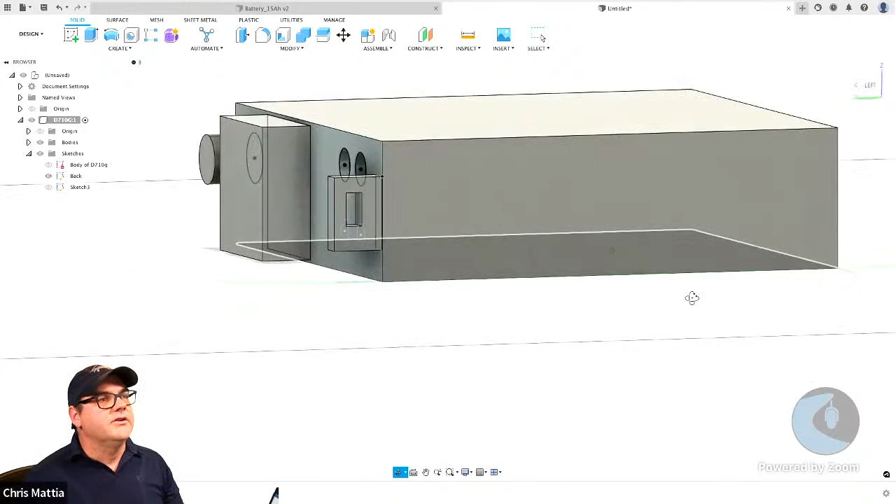Now, is this perfect? No, not by any means. But what it does do is it allows you to now combine some of these tools together.

So let me save this real quick. I'm going to hit Save, Command or Control S, and name this the radio. I'll call it the D710G, and just hit Save.

So how does all of this work together? If I come up here to create a new project, just like we did before, and hit our little waffle menu, we can see here's the battery we just created, and our D710G is this one right here. So we have a brand new project open, a blank canvas.

Let's say we want to bring in the battery. We can come over here to the left, right click on our battery, and say insert into current design. Oh, hold on, I've got to save it. Let me save the current design first. We'll call this our new Go box. There we go, now that it's saved, I can come over here.

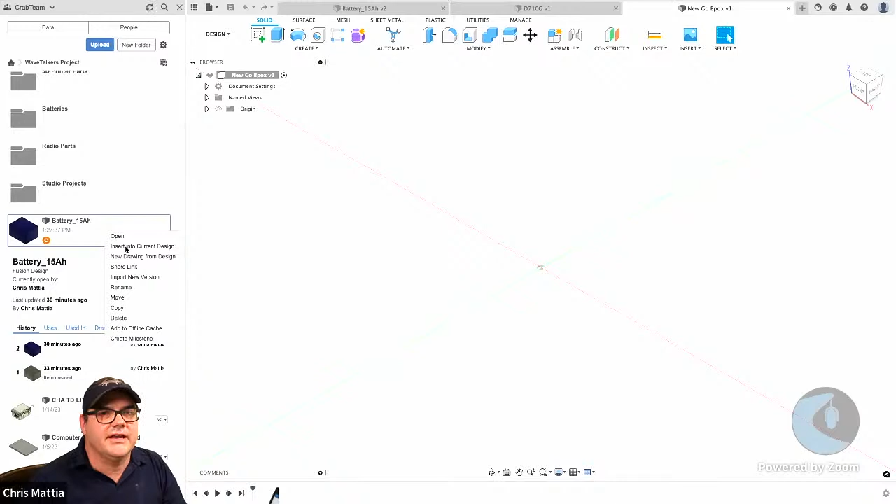I can right click on the battery we just created, insert into current design. We get a little spinny, spinny, spinny, and there's our object. We can then push it around so the battery is where we want it in this new design. We can also now come over to our...

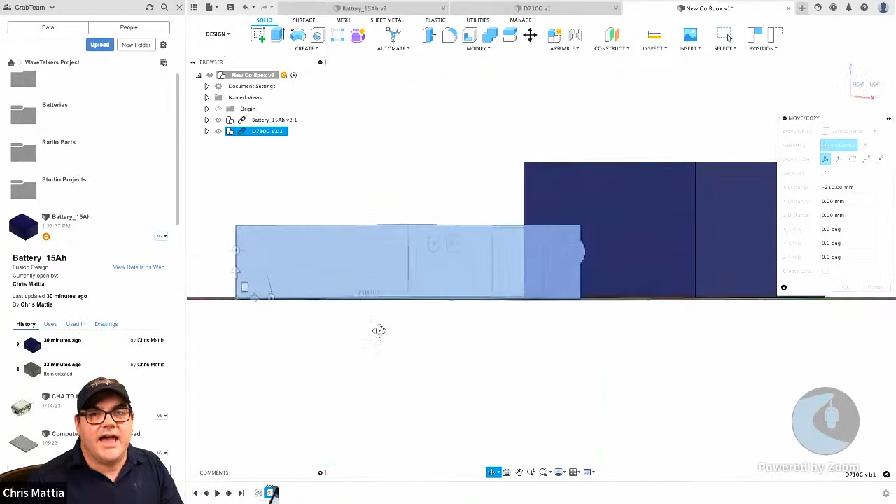D710 we just created, right click on it, insert into current design. Spin, spin, spin - this is now in here as well. I can grab this arrow, move it over. Let's zoom out just a little bit, hold down shift. Now we have the size of that battery next to our radio. So pretty quickly, you can get in and start to do some basic manipulation to recombine these different files or projects that you have. I'd enter a return to lock that in.

All right, now I want to switch gears, because I want to take all of this that we've been doing and apply it briefly to a project that I've had in mind for a while.

About line winders - here's a line winder that I got. This one's made by Buddipole, and I've got the wire wrapped around it. You can see how I wrap this wire in a figure 8 pattern, so when I pull the wire off, it doesn't have all the kinks and twists in it.

What I like about this winder is it's got these really deep cuts in the top and bottom, so the wire stays on the winder really well. I also like having the handle on here because it gives me a place to hold on to while I'm working with the wire, working with the line that's here. It has this horn on here, which is really nice for wrapping the edge of the wire around. If you're using this as a counterpoise wire, you can shorten the counterpoise wire really nicely.

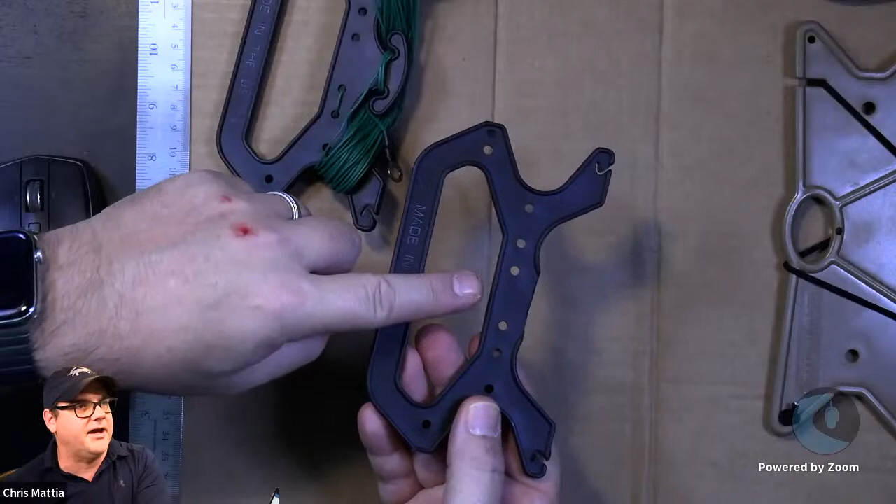That works really well. However, when you're winding it in this figure 8 pattern, this horn always gets in the way, and it really drives me absolutely crazy. So like any good ham, I just modified one of mine - I grabbed a hot knife and literally just cut the horn off. This works a lot better for me. I'm able to just wrap the wire onto here. It works really nicely - I'm actually pretty pleased with the way this operates.

However, there's a lot of times when having this horn is really helpful to be able to shorten that counterpoise wire. The other problem I don't really like about this particular winder is when you go to get your wire started on it, you've got to hold on to the wire, or thread your wire through these different holes in order to hold it in place so you can get the start of winding that line onto your winder. I'm really not a fan of that.

This is a winder that's made by Chameleon. Let me move the cardboard out of the way. So the Chameleon winders, the thing that I do like about them is they've got this really nice cord that wraps around to hold your wire in place. Super nice to be able to do that.

However, the thing that I don't like about this is the notch is really shallow, and anytime I go to wind wire on here, it starts to build up and pulls around, and then I'm stuck trying to grab hold of it and hold on so I can wind it up. It also doesn't have a good place for me to hold on and start winding the wire. I've got to thread it through the hole and pull it tight. That's not, to me, a very good design for this.

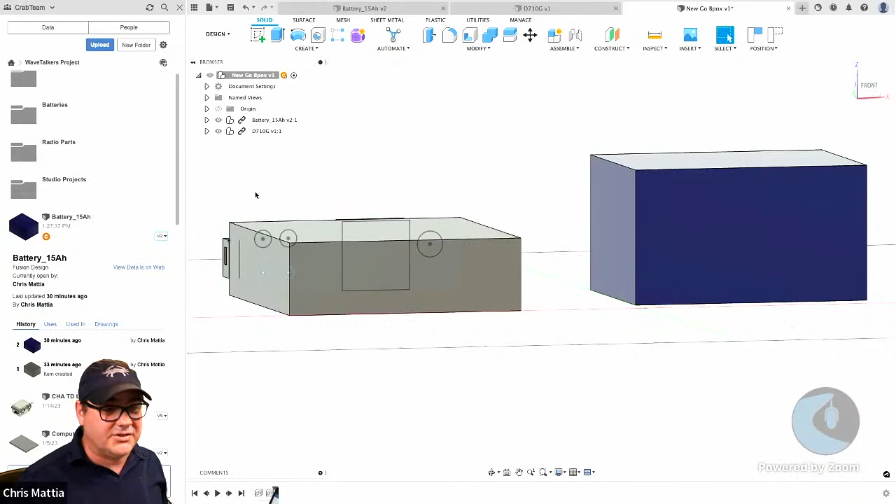So I'm going to come up here and create a new design. Once again, I'm going to start off by creating a new component. I'm going to call it the wave. Whoops, you got to be really careful when you're typing on this. Actually, I'm just going to close that and create a new one because I don't know which mode I've gotten myself into. So come on, close, don't save. Just create a new document.

New document, right click, new component. I'm going to name the component my WaveTalkers line winder. I'm going to hit OK. So I've got my component, pretty straightforward.

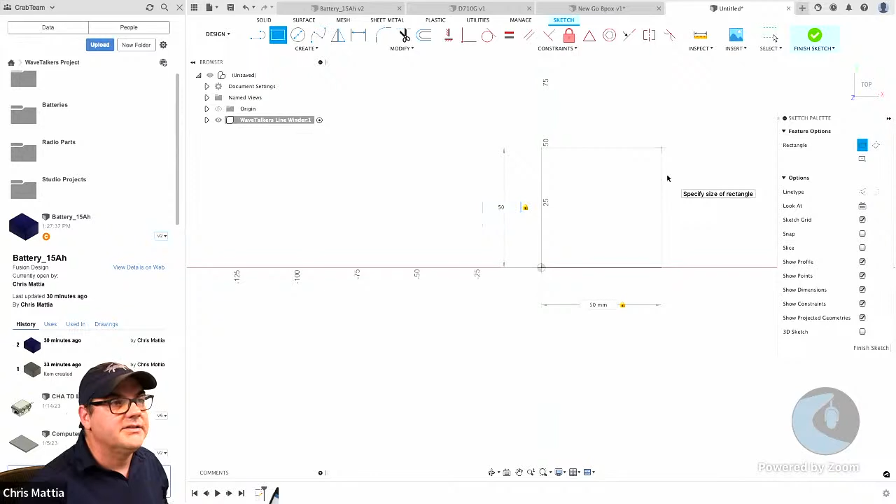We're going to start off, make a sketch, and grab my XY axis just like we did before. We're going to start with a really simple rectangle. I'm going to click the rectangle, come down to the origin, click and drag out. What size should this be? I don't really know, I'm just kind of thinking through this in my head. Let's make it 50 millimeters by 50 millimeters. I'm going to type in 50, hit the tab key, 50 again. I've got my 50 millimeter by 50 millimeter rectangle.

I'm going to come over just like we did before, hit the Q key and select that. So we're going to extrude this up. Let's make this, I don't know, 5 millimeters thick. We'll type in 5, hit enter, return, and we have our little tiny rectangle here. Perfect, wonderful. Click the little twirly drop-down thing.

We're going to come back up to our sketches, click that, right click, edit sketch. All right, we're back inside of our sketch. So one of the things I said I really liked about the Buddipole one was that really deep notch at the top. So let's model that.

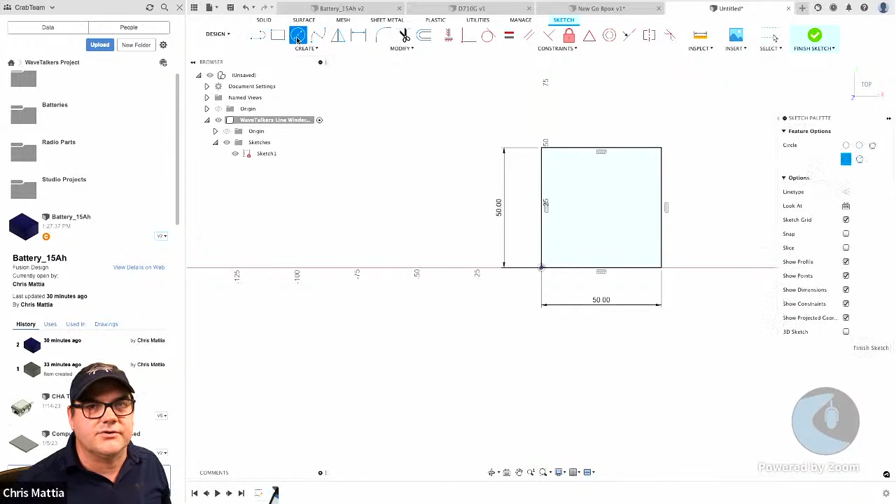We're going to take a circle, grab the circle tool, come right up here to the center. Notice as I move along the center, I get a little X, so it tells me I'm on that center line, and I move it right to the middle and it snaps into place. So that tells me I'm at the center point. I'm going to drag out, and let's make this, I don't know, 25 millimeters. I'm just typing 25, hit enter, return, and I have that in there. Great, wonderful.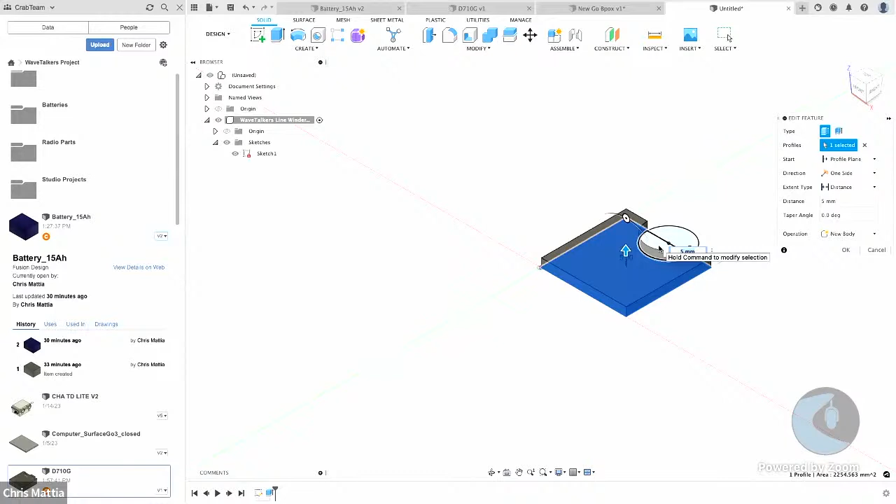Let's go ahead and make that now a hole in the initial sketch. So how do I do that? Well, I'm going to come up here and finish the sketch. I'm going to come down in my timeline. Here's that extrude we just did. If I right click on that extrude, I can say edit feature, and I go right in here. I can see that little circle. I'm going to click on that so it deselects the circle, so that first extrude is not going to extrude the circle. I just click OK. Look at that, that's kind of cool.

So now I have a little tiny notch cut in the top of my extrude. But this is kind of a weird little widget. I really need to have the bottom of this down here. So what I would like to do, instead of having to draw the top and the bottom, I'm going to let Fusion do the work for me.

I'm going to come up here and click on the create option in the 3D sketch, and go down to mirror. There's this new mirror command. Here's one of the new things that we're going to do.

Now it's asking what object I'd like to mirror, so I'll select this object. Then it asks for the mirror plane, so I'll click on mirror plane. Hold down shift, drag up, that's this plane right here, the bottom edge. Watch this. I click on that and it grabs whatever I drew on the top and just flips it over for me. Perfect. And the operation is a join.

So there we go. Now I have the top of my winder, but it would be nice to have a place for all my wire to go. So I want to cut this section out right here.

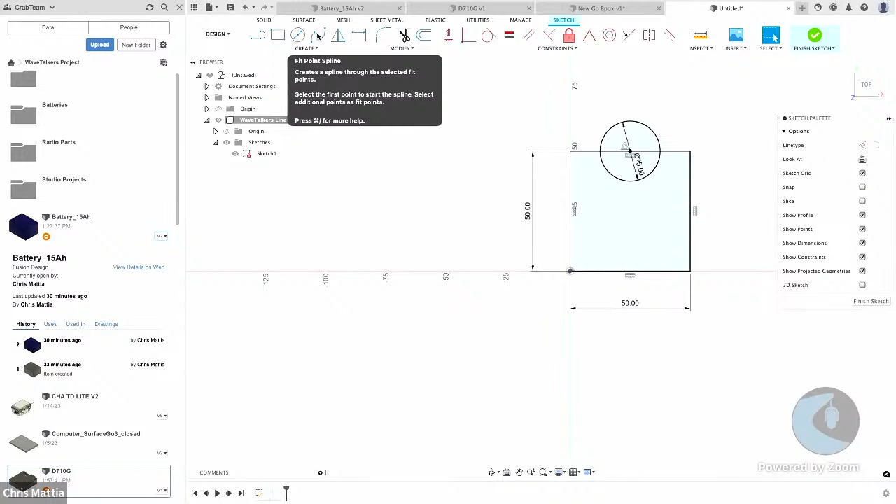So let's go back over to our sketch. We're going to right click on it and edit the sketch. We've been using the standard tools of rectangle and circle, but the next tool over here is the fit point spline, whatever that is. It's a curvy line, so we'll click the curvy line tool.

We're going to come down here, maybe about right here on this bottom one, and click to add a point. We'll come up here and click, then come up to the top and click again. Now to finish this off, I'm going to click on this little circle with a check on it. Boom, that creates this little swoopy curvy line thing.

I can now grab those little handles. Oops, hit the escape key so I get out of that tool. Grab these little curvy handles and click and drag out to make this curve look more like I want it to look. This could take a lot of finessing to get it exactly right, but we'll go with that for right now.

All right, let's finish the sketch. We're going to come back to our timeline and grab that extrude, right click on it, edit the feature, and just click on this new little bit that we cut out. When I click on that, it deselects it. We'll say okay, and look at that. Now we have a little swoopy cutout here for that whole area of our winder.

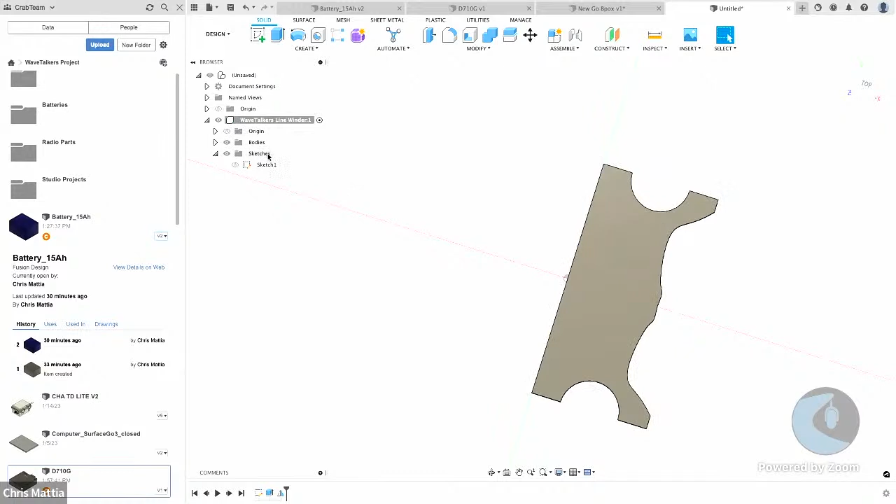Perfect. All right, let's go through and add the hole and the notch for being able to add the fancy little chameleon strap thing that they came up with. Love that. So we're going back, we're going to edit our sketch.

We'll just make a little circle hole. Maybe how about right here? We'll click, drag, and make that, I don't know, 3 millimeters. You could play around with this to find the right size hole for what's going to work.

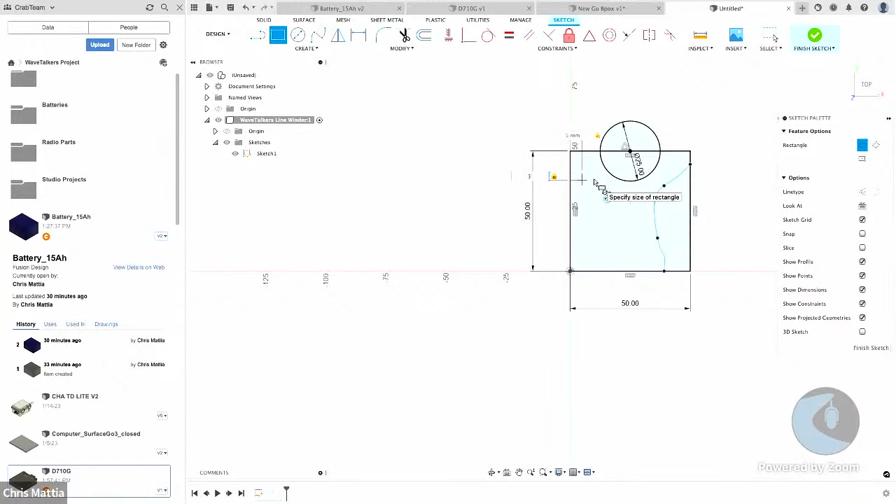Okay, I got that. Now I need a little notch. Well, we already know how to make a notch. We'll use the rectangle tool and click and drag a little rectangle. Let's make that 3 millimeters in by 5 millimeters, so 5 millimeters in and 3 millimeters high. We'll just say enter, return. Great, so we've got a little notch here that's cut out. That's going to work pretty well.

Now, one of the things that I really didn't like about either of these two designs is that there was nowhere for me to get my line started. I didn't have a place where I could simply just hook the line on and pull it out. So I want to create that. That's going to be a brand new thing. We're going to design that from scratch.

We're going to use a rectangle here. We're going to come down to the bottom, just click and drag a little box out. Let's make this, I don't know, 20.

Let's make it 20 by 20. Hit the tab key, type in 20 again, hit enter. We've got another rectangle, and then let's put a little post right here in the middle.

We'll use another rectangle for that. Down on the bottom, click up and about like that shape, and we'll make that maybe 10 millimeters wide and about 5 millimeters. 10 by 5. Escape. 10, hit the tab key, 5, there we go, it's locked in. Hit enter.

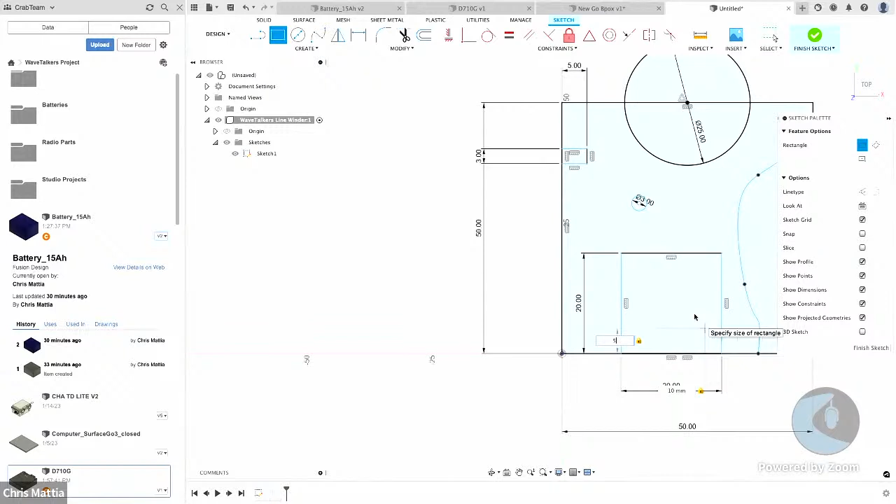So I've got a little inset here. Since this is, let's use the dimension tool, the D, and make sure that dimension is set to maybe 5 millimeters, so it centers that little notch that's in there. Okay, so that's all pretty good.

Now we need to do 2 different extrudes. We need to get this circle so that the circle and the little notch appears on both the top and the bottom of the mirror, and we need to make it so that this hole is only here in the top portion.

All right, so let's finish the sketch. Let's do this hole first since we're in here. So we're gonna hit the Q key to do an extrude. I'm gonna click on this body, right? Come on, let me get it. It's not gonna let me.

Cancel, we'll do the other sketch first. We'll come back over to our original extrude, right click, and let's escape a few times. Right click. Come on, oh, I got to finish the sketch. There we go, right click, edit feature. We'll click that notch, we'll click that circle.

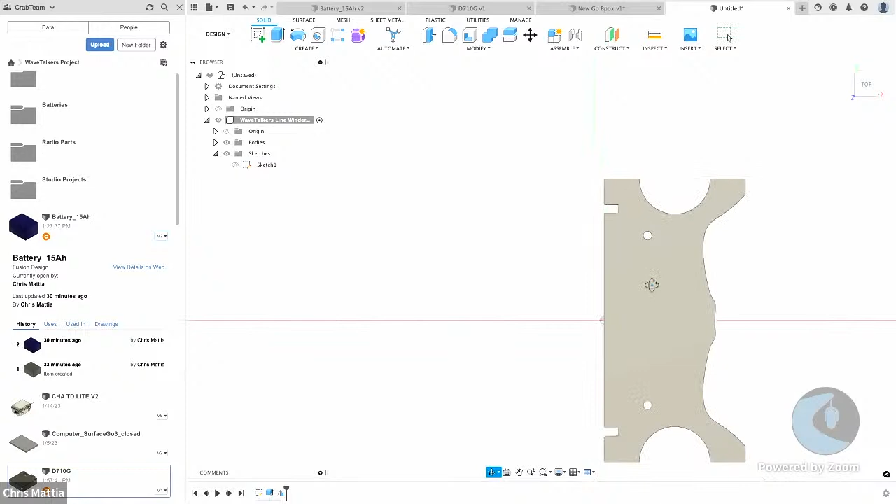We'll say okay, and now we have our hole and our notch on the top and the bottom. That's looking really good. Now we got to get this other hole cut in there.

So we'll go back to our sketch, right click, edit sketch, hit the Q key, and we're going to select that notch, which should get us... sometimes you'll get this where you have a hard time getting a selection. So one of the features we haven't shown you is to turn off a body. We'll turn that down and get rid of the 3D body, and that allows us sometimes to be able to select that sketch.

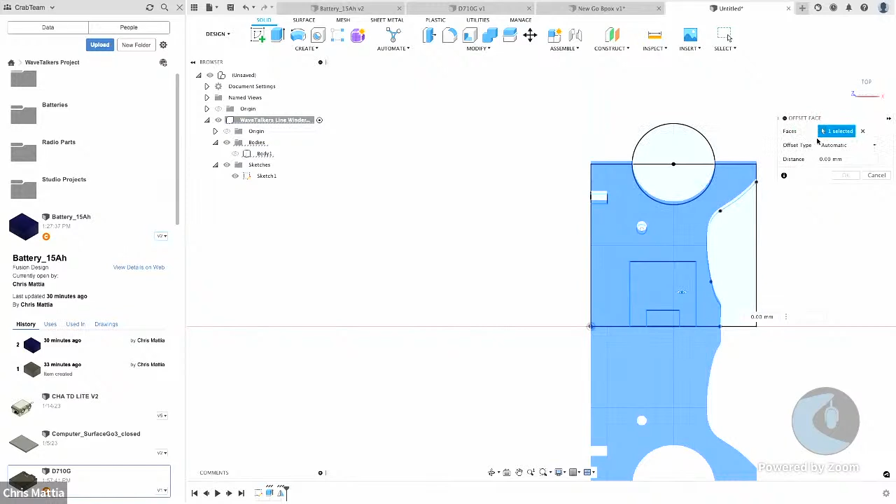Select face. Now let's go up here, change the selection object to focus on a face, should allow me to focus on right there. Let's try grabbing. Oh, no, that one, this one here. Try grabbing the edges. It's not letting me do it.

Let's try the offset tool, the extrude tool. Nope. All right, well, sometimes Fusion gets into these weird things. What we're trying to do is just select that one object without getting that to extrude, but you get the idea as to where we're trying to get to with this.

To finish this up, let's add a little bit of smoothness to the edges here on this. I'm going to turn the body back on. Oops, turn the body, oh there we go. Now is it going to let me select that? No. There we go, finally, now I've got that selected.

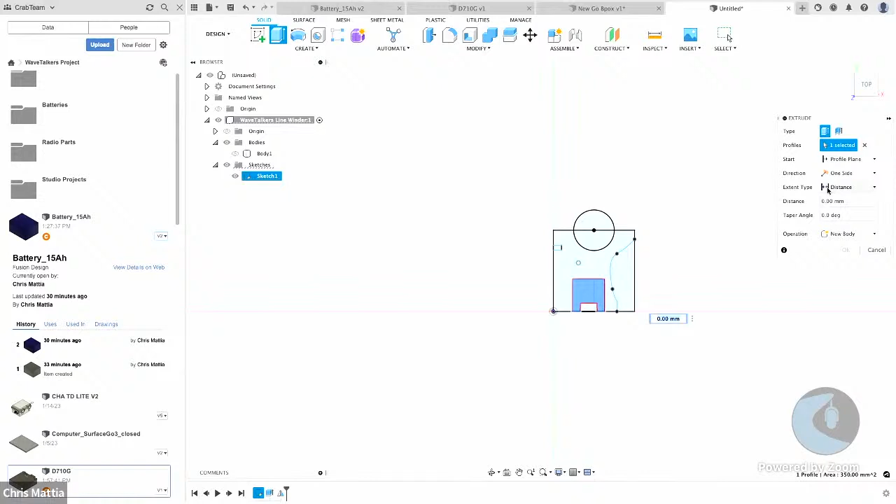And we want to do, instead of distance, we want to do to object. Now we want to turn the body back on, flip it around to the back to select the back of the object, so that should cut a hole all the way through it.

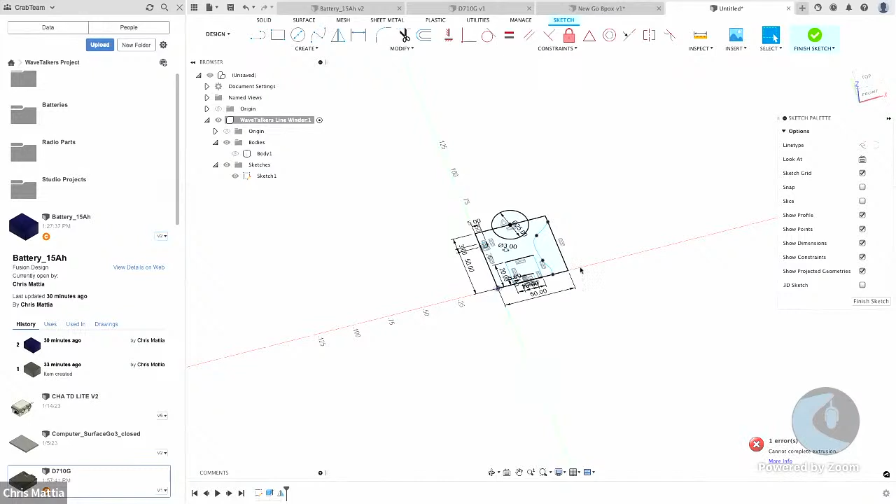Selected. Nope, it's not letting me. Cheat, and we'll just do negative 5. There we go. All right, it's not letting me, so we'll skip that portion of it for now, but you get the idea as to what we're doing here.

Now to finish this off, what I would do is save the file, and I'm going to call it my line winder.

And directly from Fusion, if you've got a 3D printer, you can come up here to the top and go to the 3D print option, and you can export out the information. If you've got a 3D printer that works with Fusion, you can select that 3D printer and print directly from here. You can also go up to the file menu and export. When you click the drop down menu, one of the options you can export is an STL file, and that STL file will work on most 3D printers. You would then just take that STL file and export it out to your 3D printer.

And what you would end up with is this. You end up with a 3D version of your line winder.

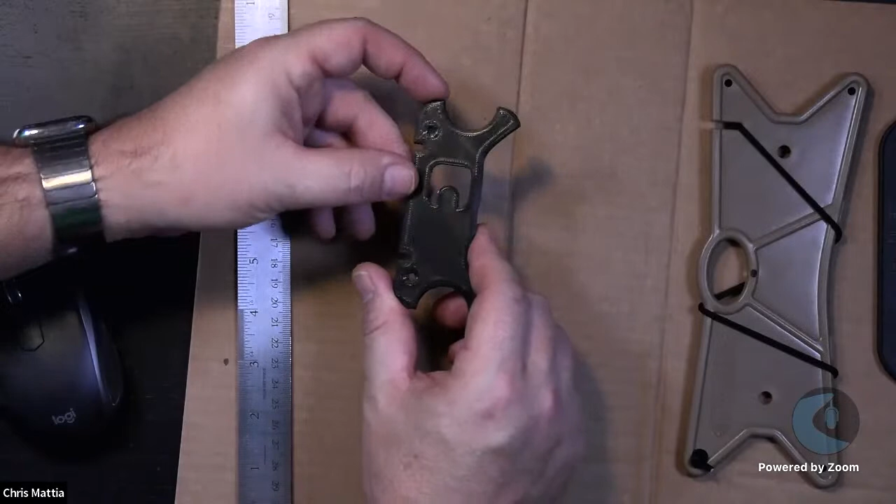Now, why would I make this so tiny? Well, when we were first modeling this, we weren't exactly sure of the sizes we wanted. Since I modeled this inside of Fusion, I could come back and expand each of those initial sides and stretch this out to the ultimate size I wanted for the particular project I was working on.

But now I have a line winder that I can use a loop to get started with, and have the openness to do the figure 8 pattern that I like. I can put a little elastic on here and wrap it around. I've got a notch at both the top and the bottom to lock that off.

So very quickly, you're able to take some idea, some concept that you have, and use tools like Fusion 360 or many other 3D tools in order to bring your ideas into the real world with a lot more precision.

And with Chris, just a question: what was the time it took you to print that, and do you have an idea of cost? Yeah, sure, so on my printer it took about 50 minutes to print this out, and cost-wise it cost about 27 cents worth of material, not counting the printer or anything else.

And you can do this on any 3D printer. You don't have to have a super fancy 3D printer. The ones you can pick up on Amazon for $300 would be able to do this. This is just printed in PLA plastic, so pretty much any 3D printer would be able to do this. You don't need any high temperature capability or anything fancy.

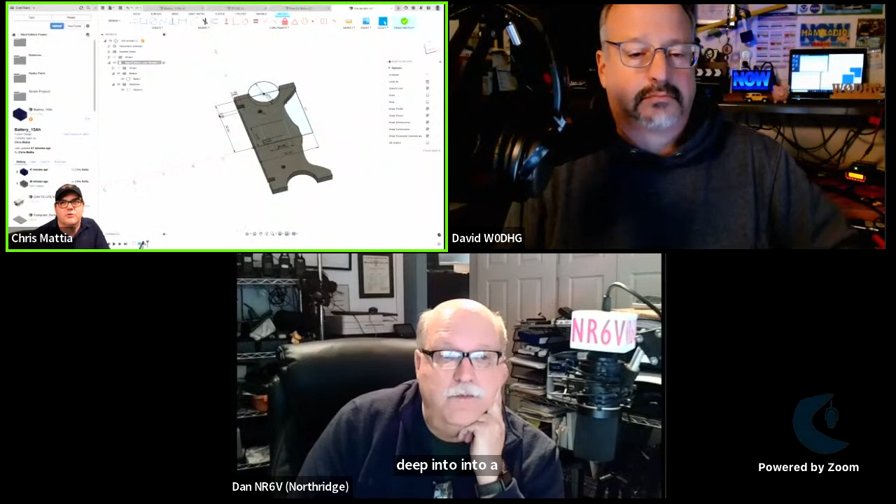Inside of Fusion, I don't want to go too deep into a sidebar here, but if I jump back into Fusion real quick - if you're in the 3D views, let me finish this sketch - in the upper right corner there's an option for Insert. If you click that Insert option, you can insert a variety of different things, including SVG files. So if you find something on Thingiverse, like somebody who modeled a little port for power pole connectors - instead of buying the one that's $30 or something, since I've got a 3D printer now, I can print that port out. I can import that SVG file directly from Thingiverse and place it where I want it.

There's also an option here for Insert McMaster-Carr Component. What the heck is that? If I click on that, it brings up the entire McMaster-Carr resource, so I can go in and find a particular screw or bolt or some different component. When you drill down through here, you're looking for the step files - you grab that step file and import it in, and you can do that.

You can also go look on some manufacturers' websites - some of them are providing 3D models. One thing I've been working on the side, I've been building here the Chameleon Tactical Dipole. I found the box on the manufacturer's website and was able to go in and grab that. I found an SO-239 connector on a different site. You just have to go in and search around. Some models you'll have to pay for - most of those I just skip right over and look for something free to do instead.